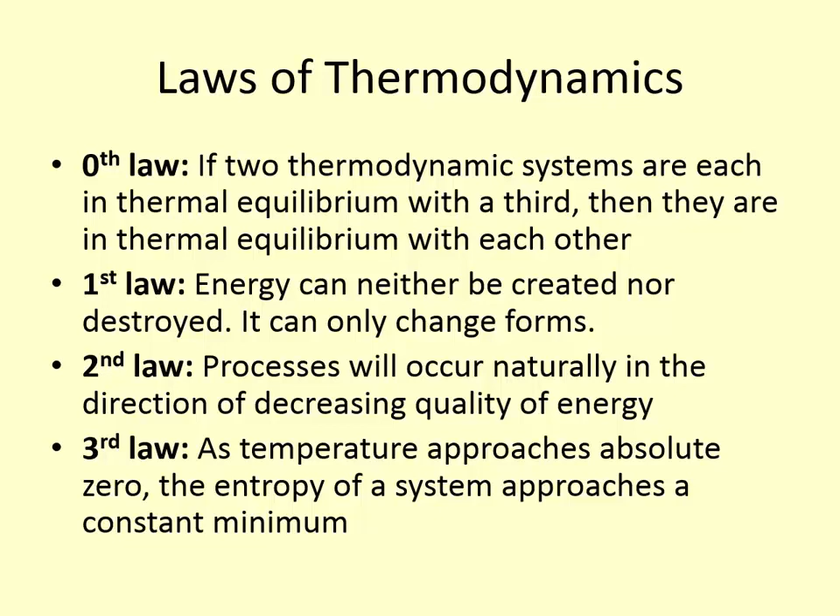So if it's an unsteady flow system, it means it's not at steady state, that there can be mass accumulation or energy accumulation or drain within the system. So the energy or the mass is changing over time. Whereas with a steady flow system, mass is not changing, energy level is not changing, but you have different things coming in and out.

Problem solving techniques. This was an important one for you to hopefully learn and follow throughout the semester on homework, on exams, on quizzes. You can use this in other classes. These steps are very helpful if you get stuck. So restating the problem in your own words just helps make sure that you understand the problem and that you know what it's asking. Drawing a picture, a schematic with known property values helps you to really organize this problem, make sure that you, again, understand the problem, what the picture looks like, and then also pull out important key pieces and put the known property values on there.

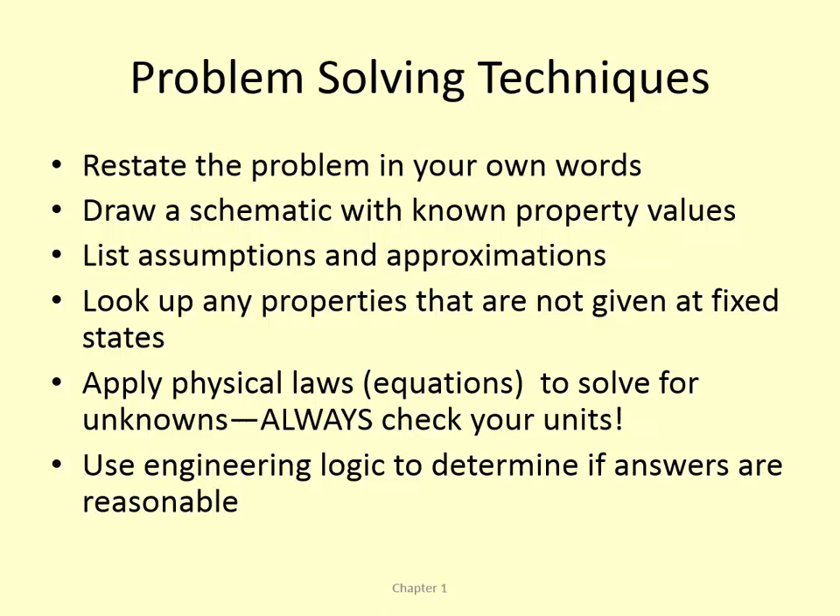And then at the end of the problem, look at it and think, is this answer reasonable? For example, if you come up with a negative pressure, that's probably not a reasonable answer. That's not going to make sense. Or if you're trying to determine cost and it says it's $120,000 per month to operate your air conditioner at home, that's probably not a reasonable answer, right? So you can use that logic to determine that.

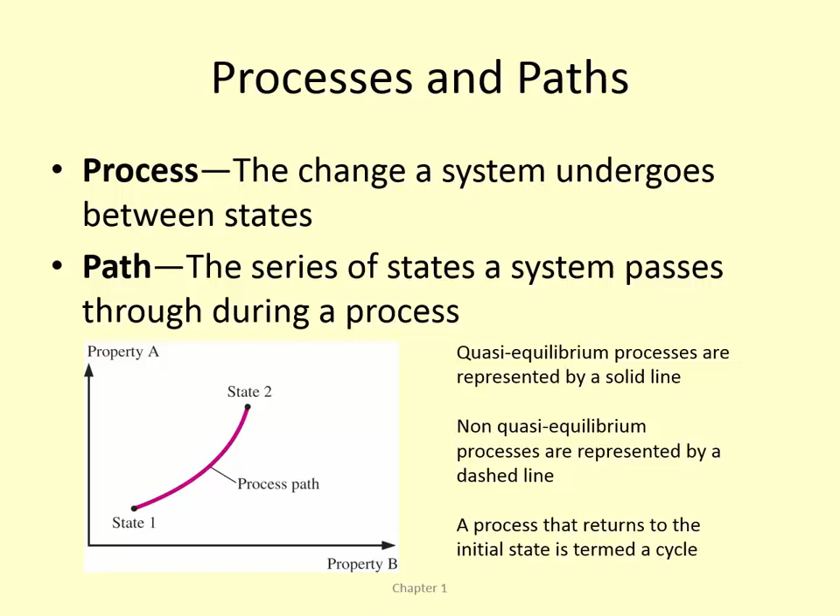Processes are the changes that a system undergoes between states, and the path is the set of states that it follows from one state to another. This process path will be represented by a solid line if it's quasi-equilibrium, meaning we know fairly certain that it's passing through all those states as we go along that process. And then a dashed line if it's a non-quasi-equilibrium process, meaning maybe it's not ultimately clear that it's following that path, but that's what we believe it's following. And if it returns back to its initial state, it's deemed a cycle. So this should all be just review.

Closed systems are ones where mass cannot cross the boundary of the system. However, the boundary may move, so volume can change or not. Energy can cross the boundaries - we can have work inputs, we can have heat inputs, but we don't have any mass flow across the boundary. So that's the main distinction between open and closed. It's closed to mass, not necessarily to energy.

And we've seen a lot of examples of closed systems where it's a piston cylinder device and the boundary moves, which in many cases we have to remember to add in that work term as we undergo the process, or undergo the analysis of the process.

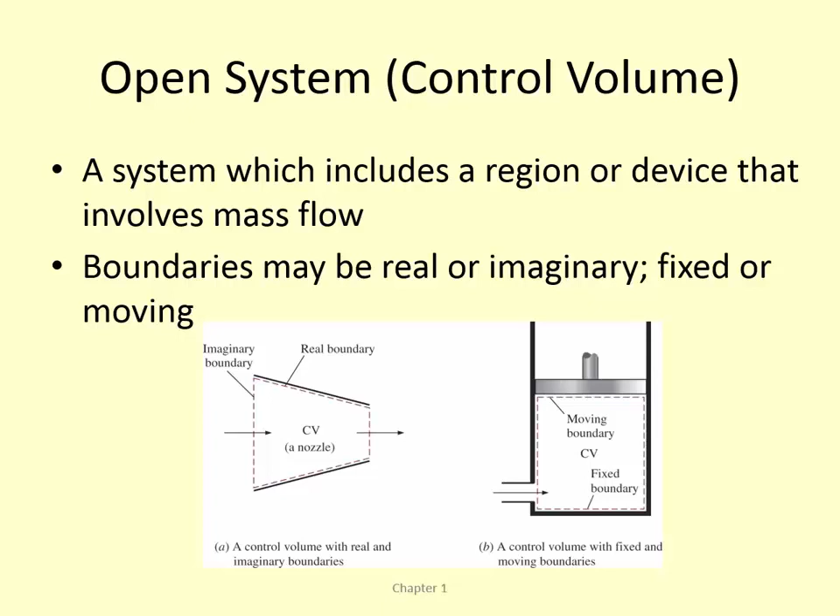Open system is also called a control volume, and it's a system which includes mass flow. So there may be openings where mass is flowing in, mass is flowing out. There may be just an inlet, there may be just an outlet. An open system is any of those cases, but we can make the distinction in subcategories of open systems that are steady flow and unsteady flow. And again, we can have real boundaries or imaginary boundaries. So the opening of a nozzle would be an imaginary boundary - there's not actually a physical structure there, but it's what we're calling our boundary. And then the boundaries can be fixed or they can be moving, like in a piston cylinder device with some sort of a valve where things can enter and exit.

We talked about properties a lot during this class, and hopefully you understand the difference between intensive and extensive properties. Extensive properties are those that depend on the mass or the extent of the system. So mass and volume are certainly extensive properties, because if you were to draw an imaginary line dividing your system in half, intensive properties wouldn't change at all - they're independent of the mass, whereas extensive properties would be divided in half. So mass and volume depend upon where you place your boundary, whereas temperature, pressure, and density or specific volume do not. And we can take an extensive property like volume and turn it into an intensive property by dividing through by the mass. Anytime we divide something through by mass, we turn it from an uppercase letter to a lowercase letter - that's the nomenclature we use in this class.

And the state postulate is that the state of a simple compressible system can be fixed by two independent intensive properties. So when we talked previously about fixing the state, it's so important that we use independent properties, and they have to be intensive properties.

Temperature and pressure are independent in the compressed liquid region and the superheated region, but if we're operating under the dome, they're not independent. During a phase change process, temperature and pressure are very much dependent on one another, so they can't be used to fix the state under the dome. We need an additional property to fix the state, and we can use that to determine how far along that line we are. We might know we're under the dome and that temperature and pressure are specific values, but to find where we are along that line, we need one additional property.

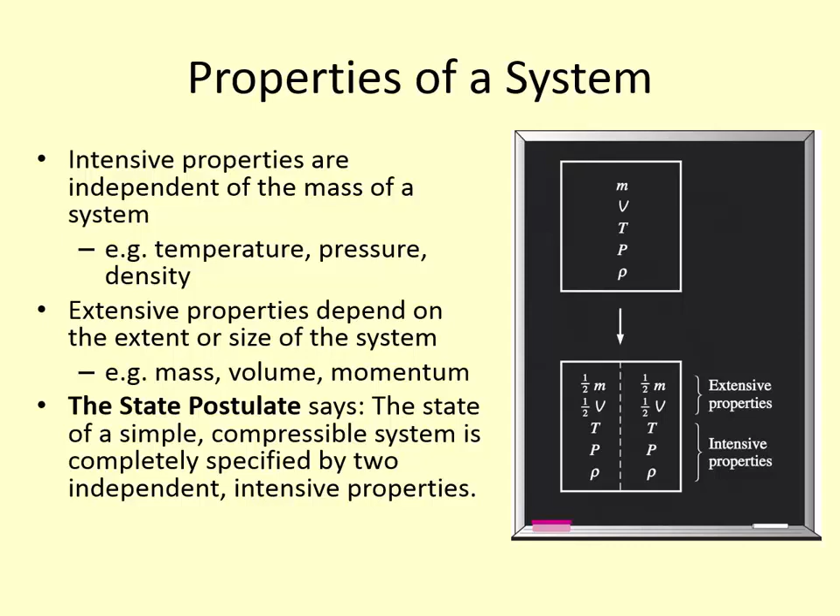The temperature scales we've used in this class are primarily Celsius and Kelvin, but also Fahrenheit and Rankine. You need to know how to convert between those temperature scales. If you're given information in a problem that's in Fahrenheit, you don't need to convert to Celsius and then to Kelvin—you can just convert directly to Rankine if needed. Be aware of how to do those conversions and do them correctly. Last exam, or maybe the one before, there were some issues with that, so be careful.

Also note that the change in temperature in the Kelvin system is the same as the change in temperature in Celsius. So if you're calculating a delta T, you don't need to do any conversion to change it to delta T in Kelvin versus Celsius. They're the same because the slope of the line is exactly the same for those two—there's just an offset. The same applies for the Fahrenheit and Rankine scales.

We talked about pressure and calculating pressure. The absolute pressure is the actual pressure at any given point. Gauge pressure is the difference between your actual pressure and atmospheric pressure. For example, when you're pumping up a tire and you measure the tire pressure, you're measuring the difference between atmospheric pressure and the pressure inside your tire—that's what a tire gauge measures. Vacuum pressure is the same thing, but if you're below atmospheric pressure, we call it vacuum pressure and state it as a positive value rather than a negative gauge pressure. So they're the same thing—absolute pressure is just the actual pressure.

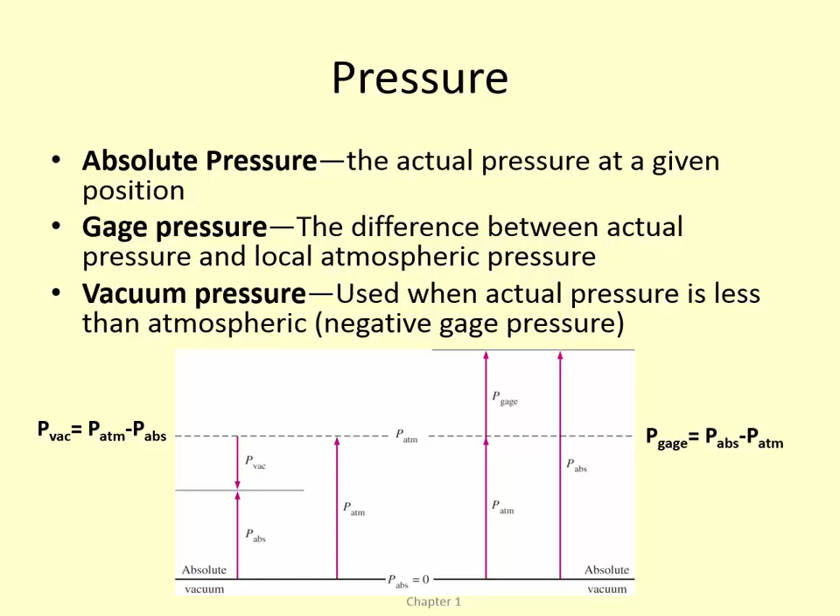Atmospheric pressure in this room is probably pretty similar to the atmospheric pressure outside, so it's also considered the absolute pressure since there's no difference between this and atmospheric. However, if we start pumping lots of air into this room, we may have a slightly higher pressure in here than outside, or vice versa because of a storm rolling in. Understanding the difference between those, and also knowing how to calculate pressure with depth—it increases linearly with depth, and that relationship is linear with density and height. We can add density times gravity times height to the atmospheric pressure to determine pressure at any depth. If there are multiple fluid layers, we can add them in series, knowing the individual density and depth of each fluid.

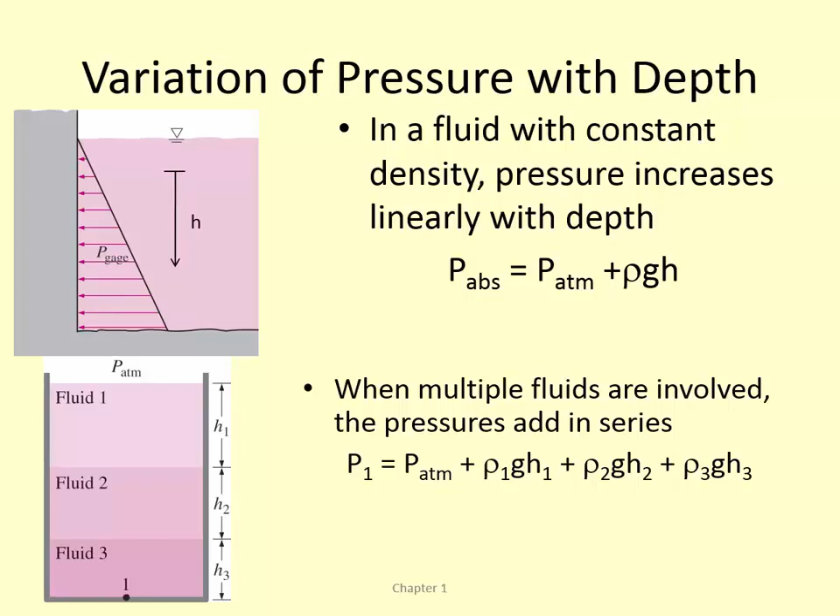Heat and work are both energy transfer mechanisms, measured in kilojoules if we're working in the SI system, and in the English system it would be like BTUs.

We recognize heat and work in the process. There's no such thing as a system having a certain amount of heat or work associated with it—we only see the effects as a system undergoes a change or process. They're recognized at the boundary of the system, and as such we can define our boundaries to either include work interactions or not. It's very important to remember this as you define your system and draw your boundary—you can purposely place boundaries such that you would or wouldn't need to know work interactions.

An example of that is a heat exchanger in steady flow engineering devices—we can use the boundary of the heat exchanger as the boundary of our system, and by doing that we don't have any heat interactions; we just have an inlet and outlet with mass flow. However, if we wanted to know what heat interactions were going on inside the heat exchanger, we would use each individual fluid as its own system, and then take into account the heat crossing the boundaries there. So anything happening within the boundaries of the system isn't necessarily accounted for in our calculations. If we're just trying to find mass flow rates, we can look at it without needing to know the heat transfer inside.

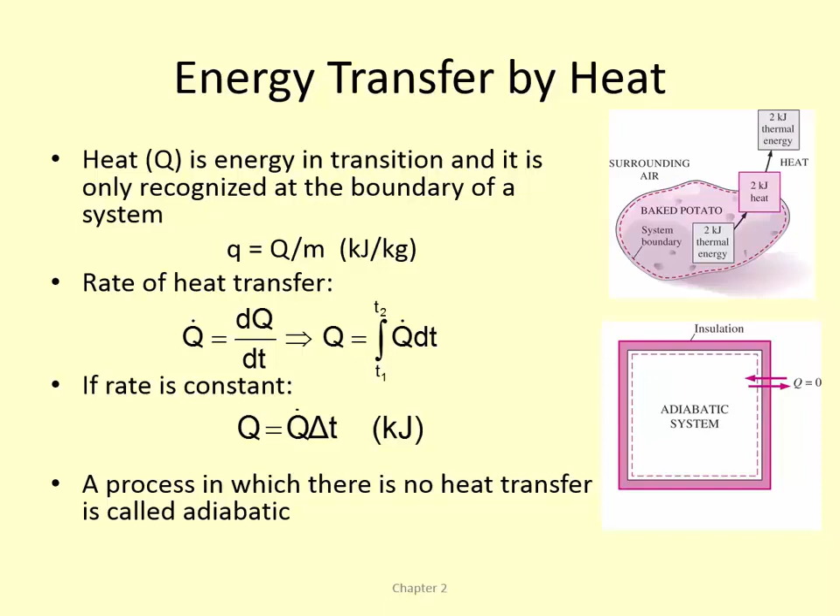A process in which there's no heat transfer is called adiabatic. It's important to distinguish between adiabatic and isothermal, because students might think that if a system is adiabatic, it's also isothermal, which is not necessarily the case, and many times isn't. Those two are not synonymous — temperature can still change due to mass flow or work interaction, so it's not a given that it's isothermal just because there's no heat transfer.

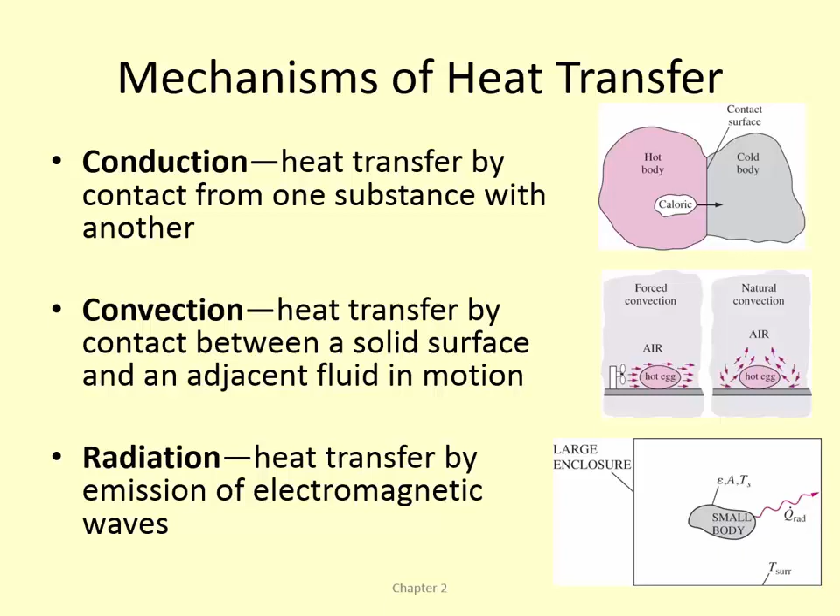We can transfer heat via conduction, which is actual physical contact from one surface to another; convection, which is heat transfer between a solid surface and an adjacent fluid; and radiation, which is transmission by electromagnetic waves. We don't really get into these three topics in this class — that's a topic for heat transfer itself, a whole semester on its own.

We can transfer energy by work, and in order for something to be considered work, either there's a force acting on a boundary or the boundary is moving. Those two mechanisms are what we consider to be work. Everything else is heat transfer.

Work is recognized at the boundary of the system. So if there are things going on inside the system that our boundary doesn't include, or they're not crossing the boundary at all, we don't have to worry about those work interactions.

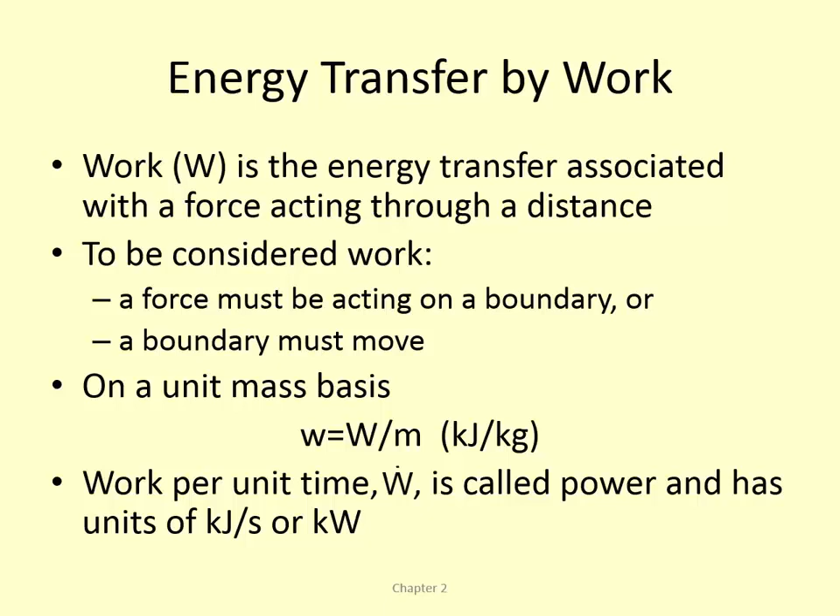There are many types of work — we've used electrical work in this class, and I think we did a problem with shaft work and spring work. There's also work required to change the potential energy of something, recognized as we go through an elevation change or distance, and work required to accelerate a body, which is the same as kinetic energy. We view those also as work terms, because either something is moving or a boundary is moving, so they qualify under work.

We can also transfer energy by mass flow. In an open system, when mass flow crosses the boundaries, we have energy associated not only with bringing mass into the system, since this mass has some energy associated with it, but also some work involved in pushing other pieces of fluid out of the way so that this mass can come into the system. We take into account both of those things in the flow work and the internal energy change.

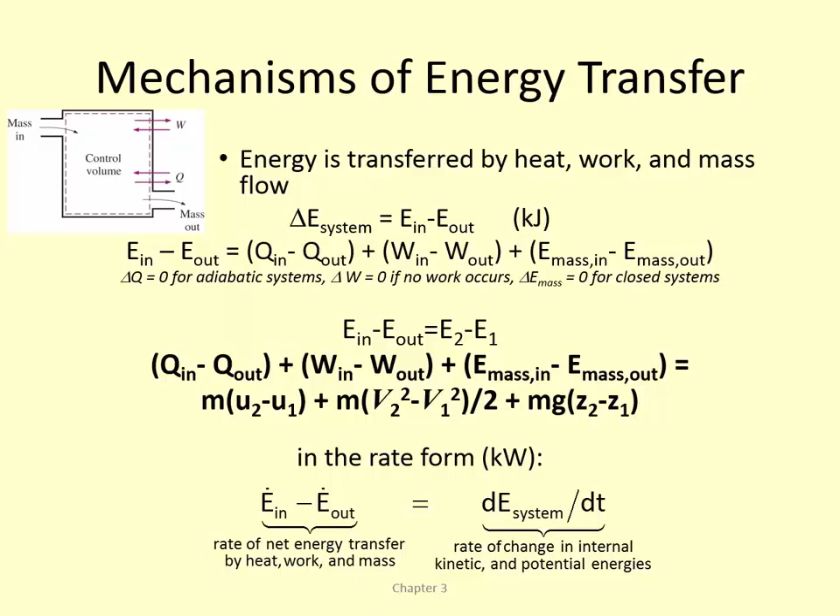We've talked a lot about efficiency in this class, looking at it in many different ways. The first way is determining something that indicates the performance of our system: we have some desired outcome or output, and we're required to put something in for that to happen. If we think of efficiency as desired output over required input, it's easy to apply it in many different situations without necessarily having to memorize the equations.

So whether we're looking at steady flow devices, turbines versus compressors, or something that's work consuming versus work producing, we can figure out the performance for a heat pump or a heat engine without necessarily memorizing all the terms involved. We just need to remember: what am I putting into the system that's required, and what am I trying to get out?

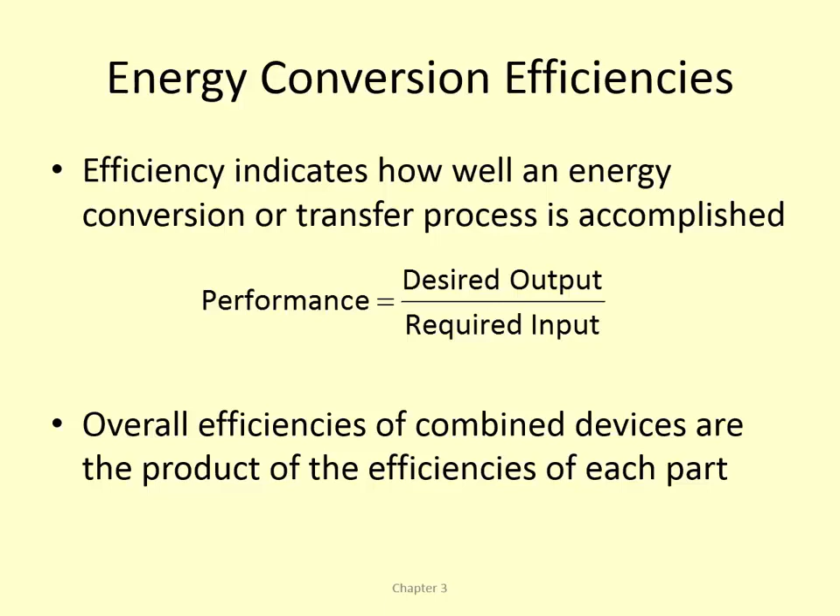And then if we calculate efficiencies of each individual piece, we can multiply those efficiencies together to find combined efficiencies.

Pure substances are ones that have fixed chemical composition throughout. We looked at pure substances as our working fluids in many of our open systems, and also in our closed systems. We make that assumption just so we can easily analyze property values, that even though air is composed of many different things, like water vapor, nitrogen, and lots of different things, we can simplify it and just look it up as air, which has a table in the ideal gas tables, and water has a table in the ideal gas table. We don't need to necessarily know all the different components of how hydrogen and oxygen change with temperature. We just look at it itself.

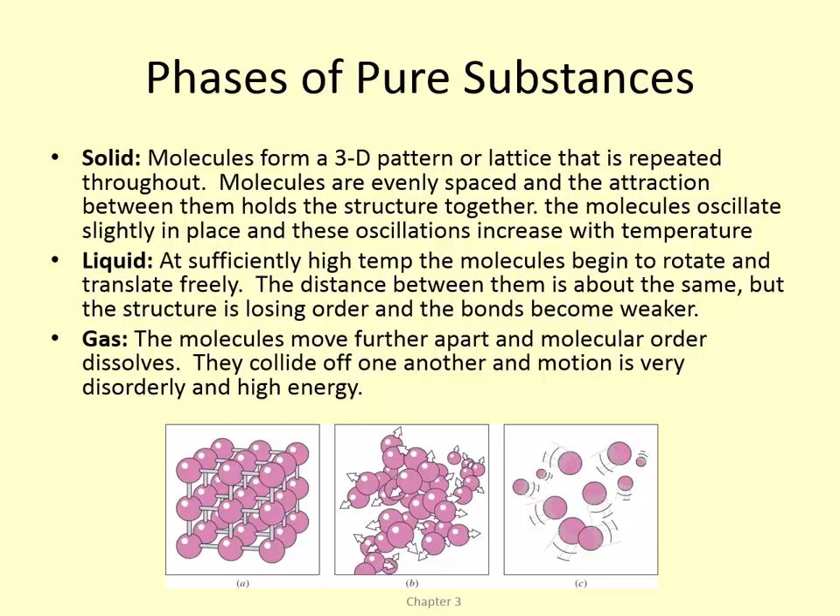We've looked at phases, so we have solid, liquid, gas. I think you understand that fairly well. The main important point is that solid is a lower energy state, but it's also a lower entropy state. It's more stable, more readily defined, whereas as we increase the motion of the molecules by adding heat, we have higher energy, but we also have higher entropy. So those are the two ends of the spectrum.

TV diagrams - we talk a lot about the dome in this class, so understanding what that means physically. We have a compressed liquid region to the left of the dome and a superheated region to the right of the dome, and everything under the dome is considered a saturated liquid vapor mixture.

It's important to know how to calculate quality, to be able to identify what state you're in. So as you go to property tables and look up pressure and temperature, are you able to identify whether you're superheated or whether it's a saturated liquid vapor mixture? And if it is a saturated liquid vapor mixture, do you know how to find the quality? That's really important.

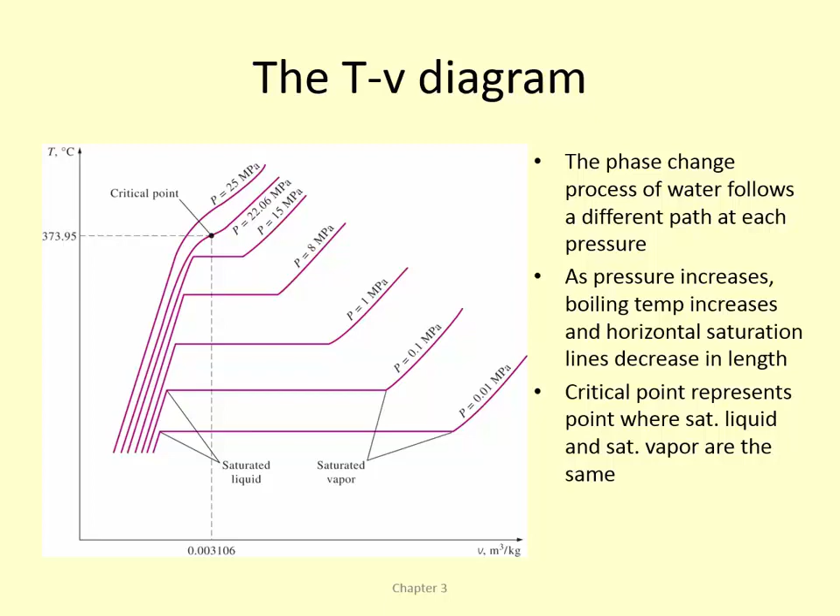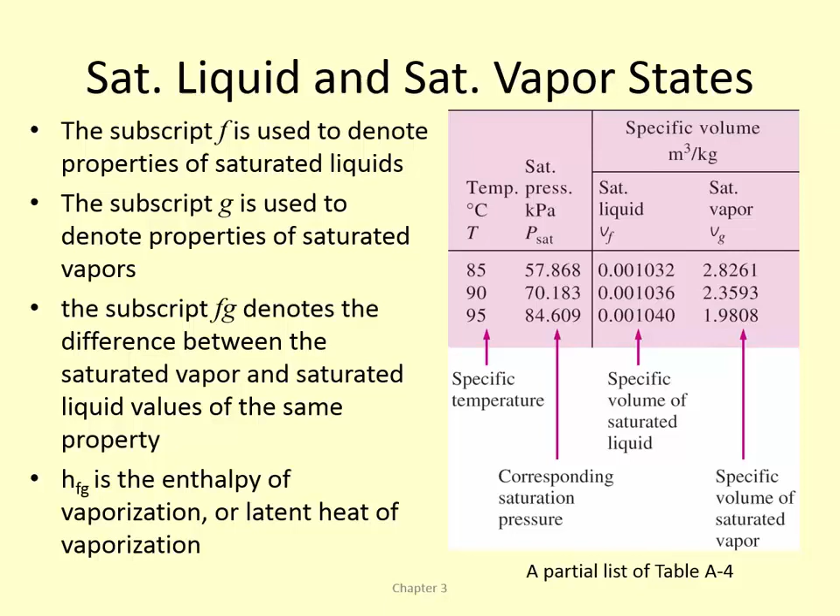Hopefully this is all review and it's super easy for you. But using the tables, we have properties with the sub F subscript meaning liquid properties, and the sub G meaning vapor properties, and then we can calculate the difference between those two, and we call it VFG, which is VG minus VF, or HFG, which is HG minus HF.

But calculating quality is, I think, maybe the Achilles heel for some students in this class - it's the mass of the vapor divided by the total mass of the mixture. So you're trying to figure out how far along that line you are. If it's a line of constant pressure or constant temperature proceeding horizontally through the dome, you want to know exactly where on that line you are, because pressure and temperature don't do it - they just tell you you're somewhere on that line.

So if you know either the fraction of mass that's in a vapor or liquid state, or if you know another property value, then you can use that information to calculate the quality. And using the quality, you can calculate all of the other property values to tell you where you are in that fixed state.

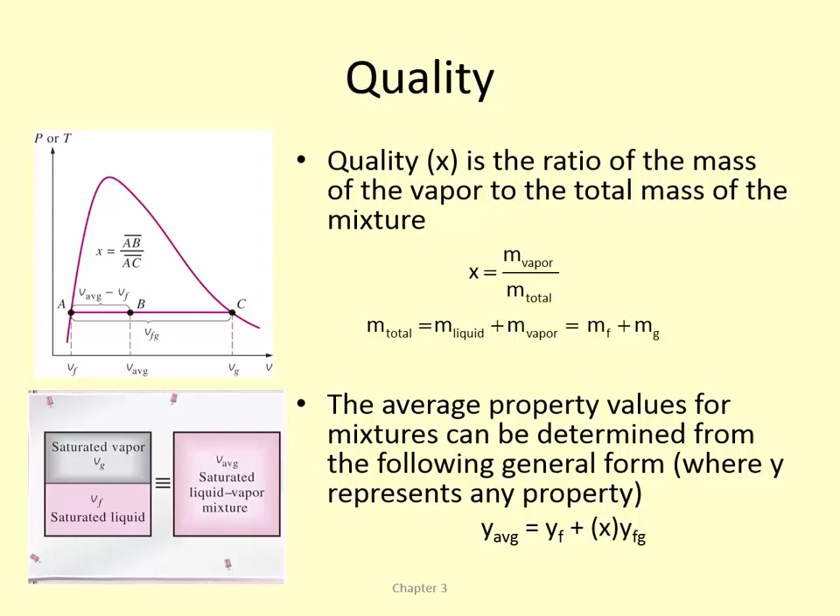We use the ideal gas equation of state in a couple of different forms, and it shows up later as we perform analysis on steady flow devices and as we look at the isentropic assumption and things like that. Again, you can only use the ideal gas equation as it's applied to ideal gases, right? It doesn't work for water, it doesn't work for refrigerant. You'll get answers that are very, very wrong from where they should be.

And if your mass is fixed, so in a closed system dealing with an ideal gas, you can set M1 equal to M2, which means that P1V1 over T1 is equal to P2V2 over T2. This only works if your mass is fixed and they're equivalent quantities at each state.

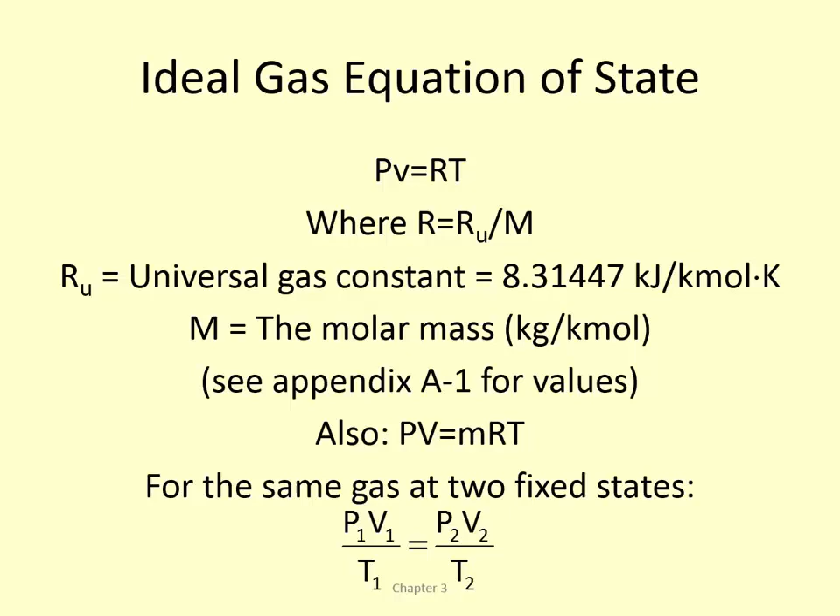The reason we can't use the ideal gas equation for non-ideal gases is because their behavior is distinctly different. The ideal gas equation prescribes a certain set of parameters that help identify how a gas will react under certain pressure conditions. So if you increase the pressure, what happens? If you decrease the temperature, what happens? It's related to the gas constant of the system, linearly changing with it. Some gases behave like ideal gases at very low pressures or very high temperatures, but anytime we're operating close to the dome, or in particular at or near the critical point, our ideal gas behavior sort of goes out the window.

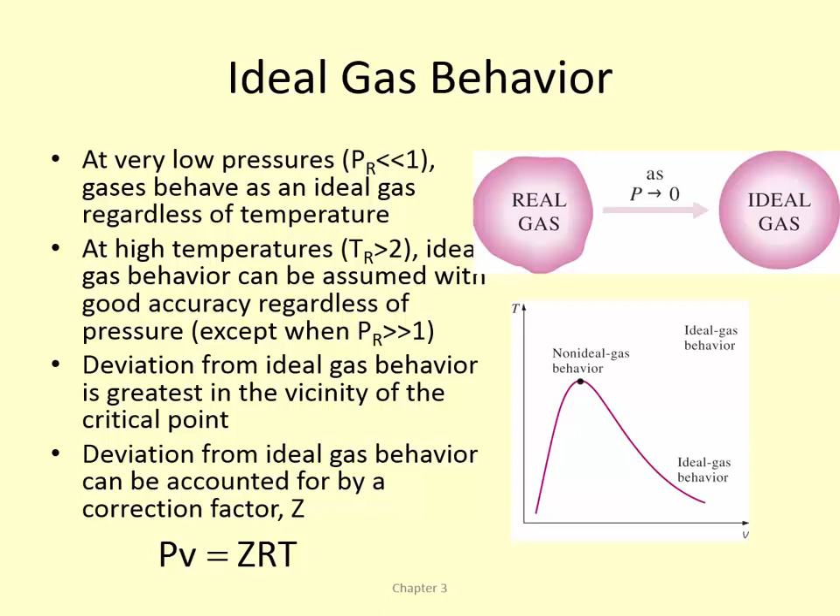We did learn how to calculate and use a correction factor Z that allows us to account for non-ideal gas behavior, and just using these same equations with this correction factor gives us a pretty good approximation for non-ideal gas behavior.

This is derived using the principle of corresponding states. There's this idea that if we divide the actual pressure of our non-ideal gas by the critical point pressure, and do the same thing with temperature, dividing by the critical point temperature, we get a reduced pressure, reduced temperature, and also a reduced specific volume if we want to calculate it that way. When we do that, we normalize our working fluid by its own critical point, and we find that they follow a very similar trend.

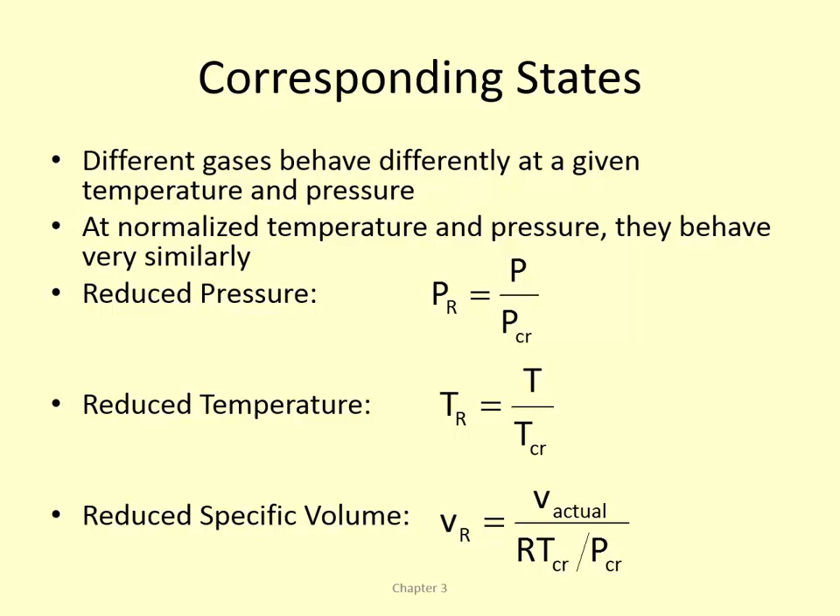These trends have been plotted on a compressibility chart. So if we calculate a reduced pressure and a reduced temperature, we can look up a compressibility factor that allows us to make a pretty good correction to our ideal gas equation, getting us closer to the correct values we'd find if we looked it up in a table. We did a little bit of that this semester. It's a good concept to remember.

We also talked about polytropic expansion or compression, where in some cases this behavior can be modeled quite readily by the relationship PV to the N equals some constant. For an ideal gas, the constant is the gas constant, so PV equals RT, N equals 1, and C equals RT.

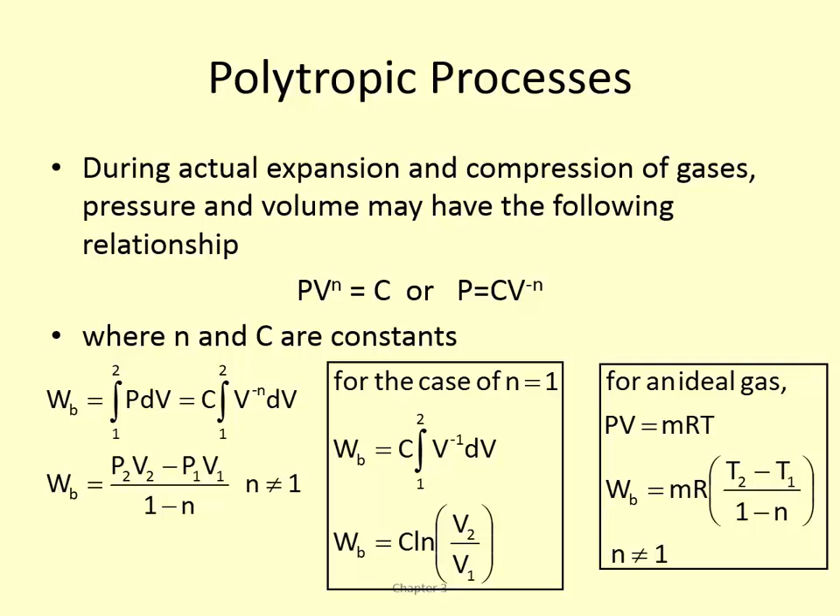We've talked about boundary work. Boundary work is just the integral of P dV, and if it's a constant pressure process, the P comes outside the integral, and we just integrate dV, which gives us V2 minus V1. So we simply need to know the distance the cylinder moves, or the change in volume, to calculate how much boundary work is being done.

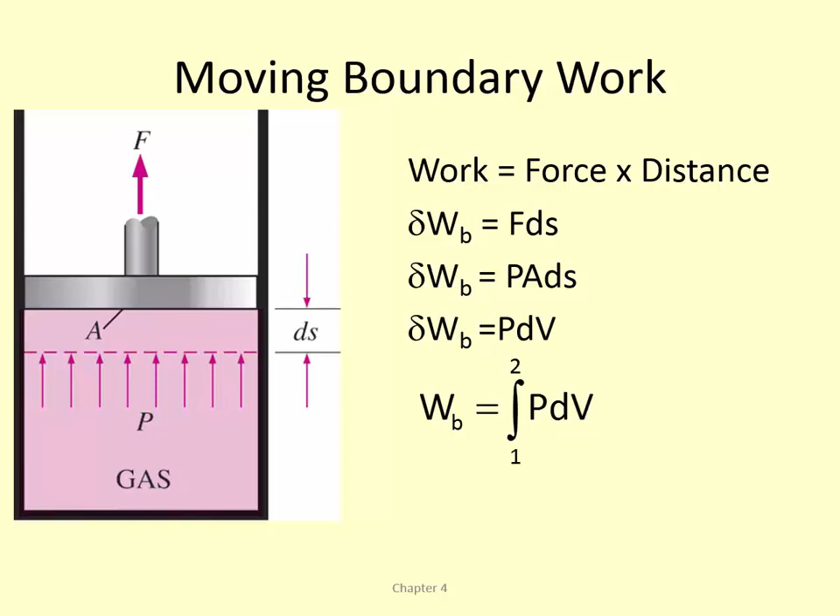We can also figure out how much boundary work is being done by numerically or graphically calculating the area under the process path. In the case of a linear path, we did many examples where we simply plot it graphically and use geometry to figure out the area under the curve. Otherwise, we need to know the relationship between pressure and volume and then calculate the integral. Sometimes that relationship is fairly easy to integrate, sometimes it's a beast to integrate, and other times we just have data points and have to graphically figure out the area under the curve.

For a closed system, our energy equation is equal to the change in internal energy. But we found in many cases that if it's a closed system with boundary work, we can take that boundary work term and move it to the other side of the equation, and we come up with this term that's delta U plus P delta V, the boundary work. This has been lumped together into a term called enthalpy. So enthalpy accounts for the internal energy plus the boundary work in a closed system.

And in an open system, it accounts for internal energy plus the flow work.

Some examples of that would be phase change along a saturation line, which is a constant pressure process. Also a frictionless piston cylinder device is a constant pressure process. Part of your system analysis is identifying any property values that might be constant and pulling that out right away, writing that down, isobaric, isothermal, whatever it might be. If it's a constant pressure process, it makes the boundary work very easy to calculate. However, you can't do this if it's not constant pressure, because P is changing.

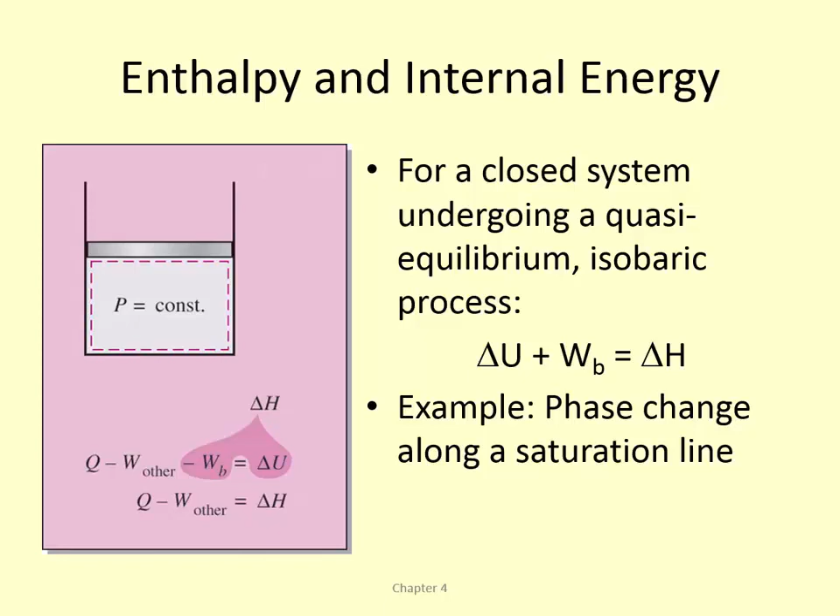The specific heat is the amount of energy required to raise a unit mass by 1 degree, and we can do that at either constant volume or constant pressure. So we have two different specific heats defined in two separate ways. C sub V is related to the change in internal energy. If the volume is maintained constant, then we don't have boundary work going on either, so we have C V dT is equal to dU.

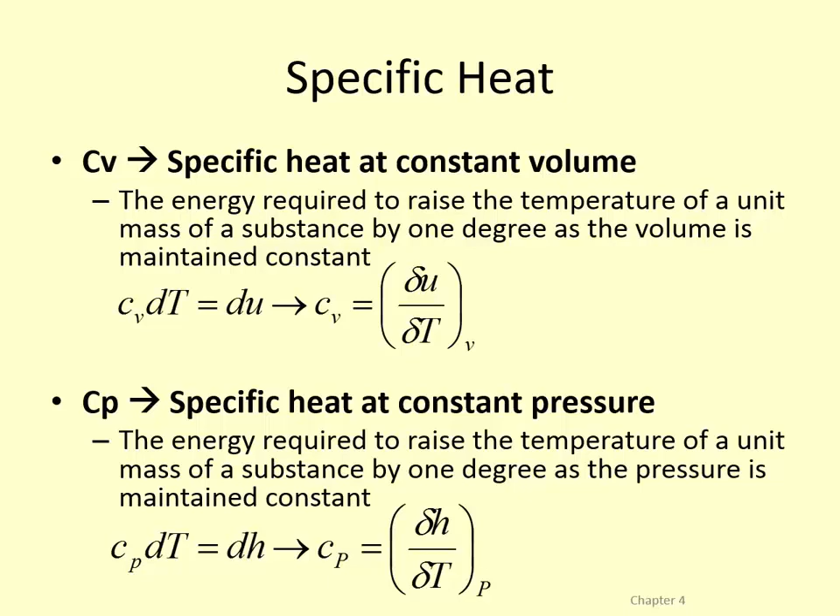For specific heat at constant pressure, maybe we do have flow work or boundary work, but it's a constant pressure process, so we have C sub P dT is equal to dH. We use C sub P quite often if we can assume it's not changing significantly, or it's a small change.

So we can determine delta U and delta H three different ways. One, we can use tabulated data for both, which is pretty easy, assuming we have tables that are accurate and up to date. We can use the functional relationship between specific heat and temperature and integrate, which is kind of cumbersome and not really fun to do by hand. Or we can say, I know C sub P and C sub V may be changing, but I'm going to assume it's just some average value. That's pretty accurate if it's a small temperature change or interval.

And you can calculate C sub P average two ways: you can either find it at the average temperature, if you know your initial and final temperature, or you can look at the beginning and the end and average those two values.

We did some examples toward the end of the semester where we didn't know a final temperature, but we needed to use C sub P or C sub V. So we guessed a final temperature and calculated using that. Then we came back and calculated our actual final temperature and saw how close it was. If it's really far off, we redo the calculation with a new estimate using a new C sub P, and iterate until we find a value that's close.

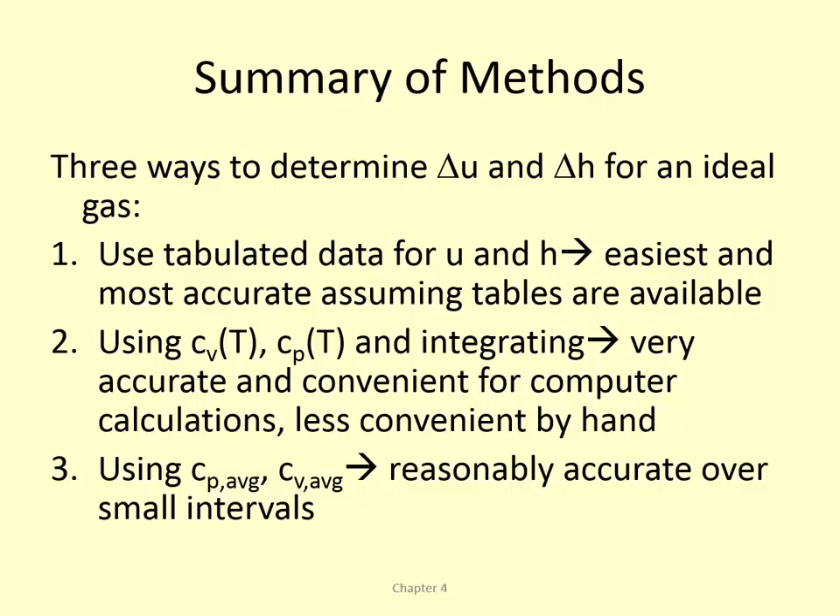I've already said I'm not going to give you a problem like that on the final where you have to iterate. But it's important to know how that process works, because many times in design you don't know the final outcome until you build something. You have to guess, based on knowledge of previous systems, about how hot it gets, so you guess a final temperature, calculate what it should actually be, and redo your calculations that way. A lot of engineering starts with an educated guess, and this is no different.

Steady state devices: chapter 5 is full of steady state devices, and it's probably one of the more difficult chapters to get through and understand. But once you do, you can apply these principles across the board to any steady state device, any kind of problem it might throw at you.

So some consequences of steady state: usually the volume isn't changing, so we don't have any boundary work. Usually the mass is constant. Well, always the mass is constant for steady state.

So dm/dt is 0, and the energy state isn't changing either, so dE/dt is 0. So our mass flow in equals mass flow out, and energy in equals energy out. Looking at those forms of the energy equation for steady state devices, with in on one side and out on the other, we can switch terms back and forth, making sure we flip the signs as we do. But these are the basic equations we use.

So we need to look at each of the individual terms for these steady state devices. That Q dot, or Q, is the heat transfer between the control volume and the surroundings. It will be a negative value, or an out value, if the control volume is losing heat. If it's adiabatic, there's no heat gained or lost.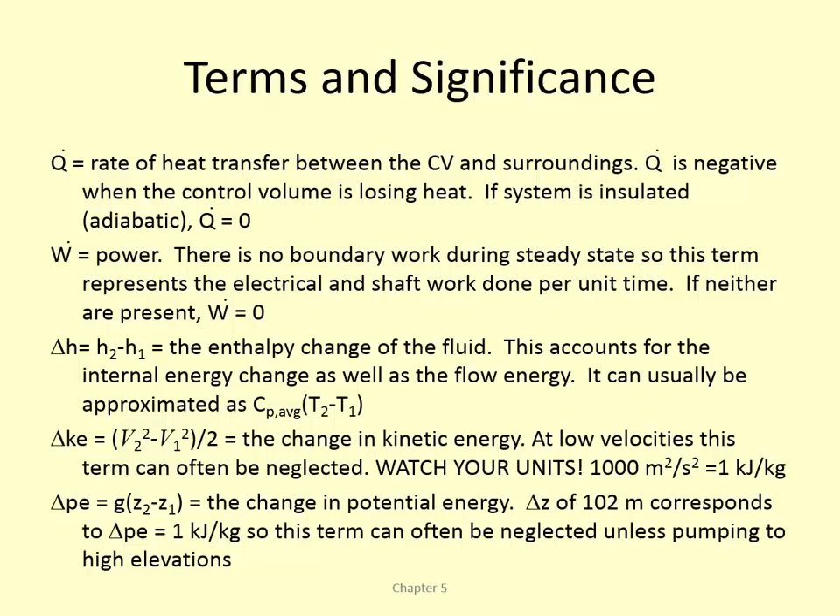So if you don't make that conversion, your calculations will be way off. The same thing goes for the change in potential energy - be very careful about your units on that. In many cases, that one is neglected because it's pretty insignificant, but it may still show up.

In general terms, when we perform the mass balance, it's mass in minus mass out equals the change in the mass of the control volume. If it's a steady flow system, then the control volume mass is not changing, so it's just the sum of the mass flow in equals the sum of the mass flow out.

And if it's single stream, we just have an m dot in and an m dot out. If it's a steady flow incompressible stream, our volume flow rates are equivalent. And if it's steady flow incompressible single stream, then velocity times cross-sectional area is equal on the inlet and outlet. Knowing which assumptions you can or cannot make and how it simplifies your equations is pretty important.

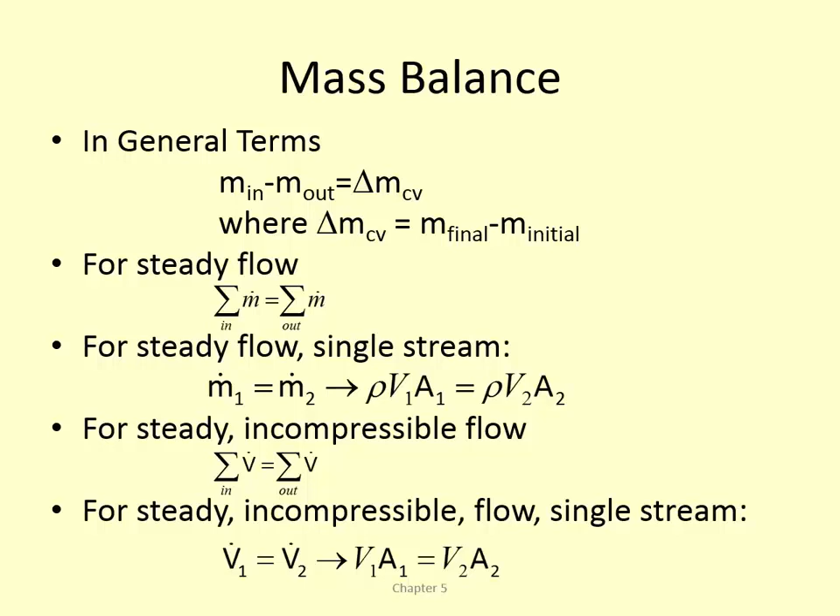Because on the final you'll have just this equation sheet - it's actually 2 pages now - with tons of equations. It's up to you to know how to apply and use them, because it's very easy to use the wrong equation just because you see, oh, there's temperature, there's pressure, that's what I need, right? You need to know what assumptions can be made.

Okay, so nozzles increase the velocity of a fluid, diffusers decrease the velocity of a fluid. There's no work interactions unless, maybe sometimes there's a heater inside the nozzle, like a little electric circuit or something. Usually it happens so rapidly there's no heat transfer, and you don't have to worry about potential energy. However, a change in kinetic energy is pretty important because that fluid velocity can change fairly significantly - in some cases, coming into the nozzle it's almost 0, and then coming out of the nozzle it's pretty high.

With a turbine or a compressor, we have mass flow in and out, and then if it's a turbine, there's a work output, and if it's a compressor, there's a work input. Kinetic energy is usually 0, but sometimes we need to know it.

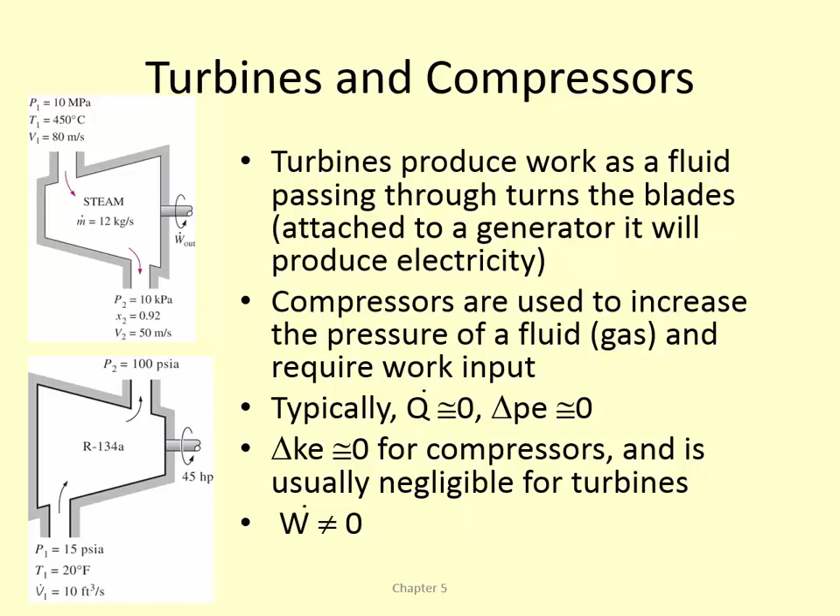If there's velocities given and you're asked to calculate it, I would calculate it, being careful about units. Our work interactions are never 0. You don't know necessarily about the heat transfer unless it's given in the problem. Usually there's not significant heat transfer because they're well insulated, but that's not always the case. As we saw with compressors, there is an advantage to actually removing heat as we compress these fluids. So later in the semester when we look at isentropic compressors, and even doing better by trying to operate an isothermal compressor, there is significant heat transfer involved there.

Throttling valves are a constant enthalpy process, and it's any kind of flow restricting device. It could be a valve, a plug, or just a very narrow tube that doesn't allow flow to pass through readily, causing significant pressure drops without needing to perform any work, which is kind of nice. For an ideal gas, enthalpy is a function of temperature only, so for a throttling valve using an ideal gas, the enthalpy will be constant and the temperature will also be constant, so they're also isothermal.

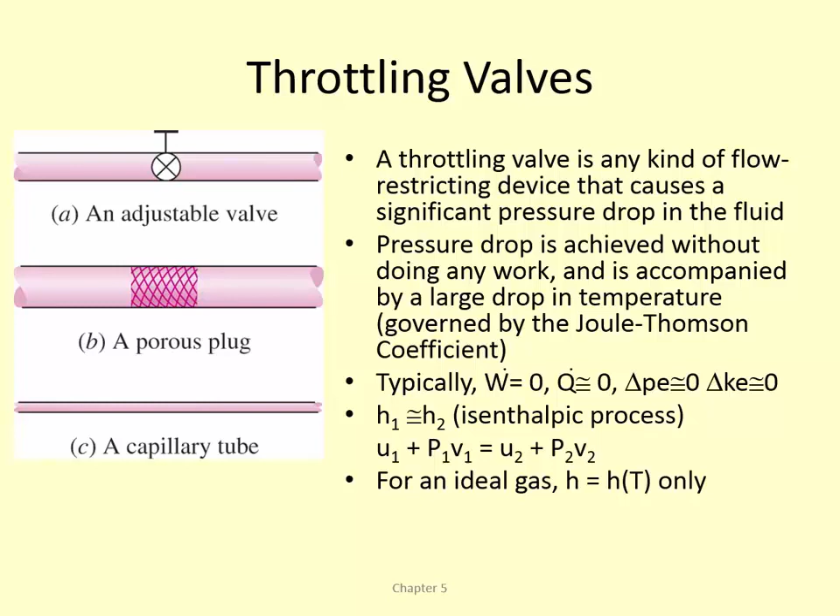Mixing chambers are any devices where two or more fluid streams come together, so they can mix and then go out one way. A lot of times it's just an elbow with cold water coming in, hot water coming in, and warm water coming out. There's usually not any work interactions unless there's some sort of stirring device. Heat transfer to the surroundings is usually zero, and kinetic and potential energies are usually zero. So you're just interested in the relative mass flow rates of each stream and their enthalpy values. You're changing the energy of the system just by mixing fluid streams of different temperatures, different energy states, and in some cases different flow rates.

Heat exchangers exchange heat between fluids without them actually physically coming in contact. Usually there's no work interactions, and the kinetic and potential energies are negligible. If we define our system as the boundaries of the heat exchanger itself, then we won't have any heat interactions with the outside. However, if we look at the individual fluids themselves, then there most certainly is heat transfer associated with that heat exchanger. That's the purpose of it, to transfer heat from one fluid to another, and the direction of the heat transfer will always be from the hotter fluid to the colder fluid.

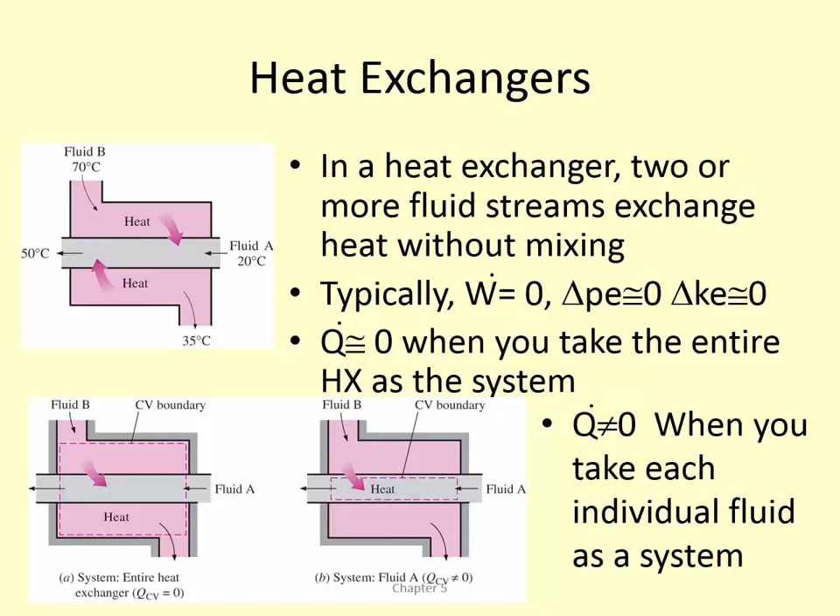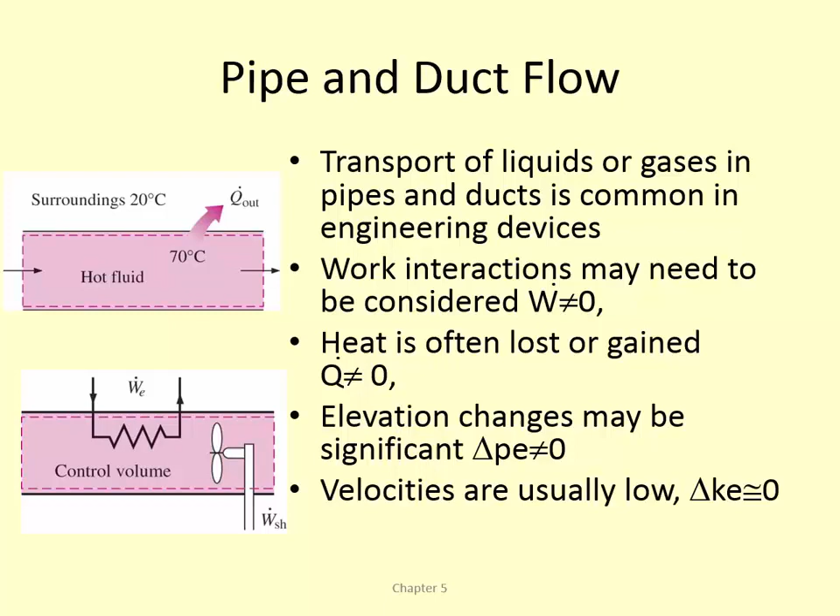In pipes, they're somewhat boring in terms of whether there's work interactions or heat interactions. We just have to look at the pipe individually and see what's going on with it, whether there's velocities that are significant or significant elevation changes. We don't necessarily make any grand assumptions about pipes. It just all depends on the problem when you get to it, and being very careful to look at it and see: is heat being lost? Are there any work interactions? What's going on with this particular pipe before you can say anything about it?

During steady flow processes, the properties of the control volume itself are not changing with time, although there may be different properties at the inlet and the outlet. The control volume itself is steady, the properties are not necessarily uniform across it, but they're steady with time, they're not changing.

During unsteady flow, the properties of the control volume do change with time. So we have to look at it over a finite time period, saying we're analyzing this system from this point to this point, and we want to know what changes have happened, how much mass was accumulated or how much mass left the system. The control volume is not necessarily fixed in size; it could be a piston cylinder device, and we could cause the boundaries to move if needed.

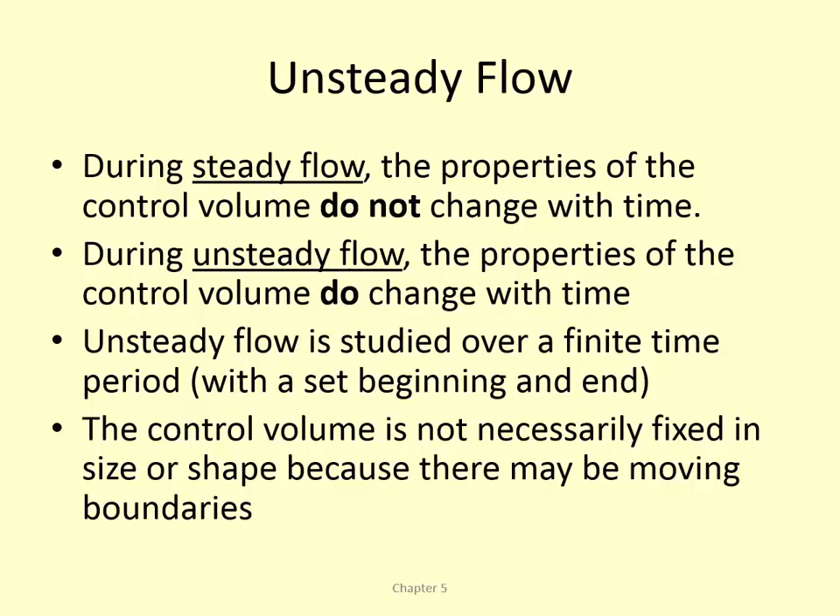So the analysis is slightly different from the steady flow because we have that additional term, or terms, on the right-hand side of the equation. But if we go back to our energy equation, start from the beginning, and are very careful when we cancel out terms, what we have in and out is equal to the change in energy state of the system. That change is equal to the internal energy, kinetic energy, and potential energy of the system as a whole. So if the system itself is moving, changing in elevation, or accelerating, that term on the left-hand side deals with the fluid flow of the streams coming in and out, whether or not they have a kinetic energy associated with them that we need to account for.

So if those terms are negligible, then we simply have Q in minus Q out plus work in minus work out, or we can flip the sign and do it that way, which is equal to the mass flow out minus the mass flow in times the respective enthalpies of those fluid flows, plus M2 U2 minus M1 U1. And that mass flow can be on either side of the equation. Again, we just have to be careful about signs.

Heat engines receive heat from a high temperature source and convert part of that heat to work, and then they have to reject heat to a lower temperature sink. Usually we have a working fluid that is changing phase in the process, going from a liquid to a vapor. We don't often need to know necessarily those energy interactions if we're looking at the large-scale macro version of the heat engine itself.

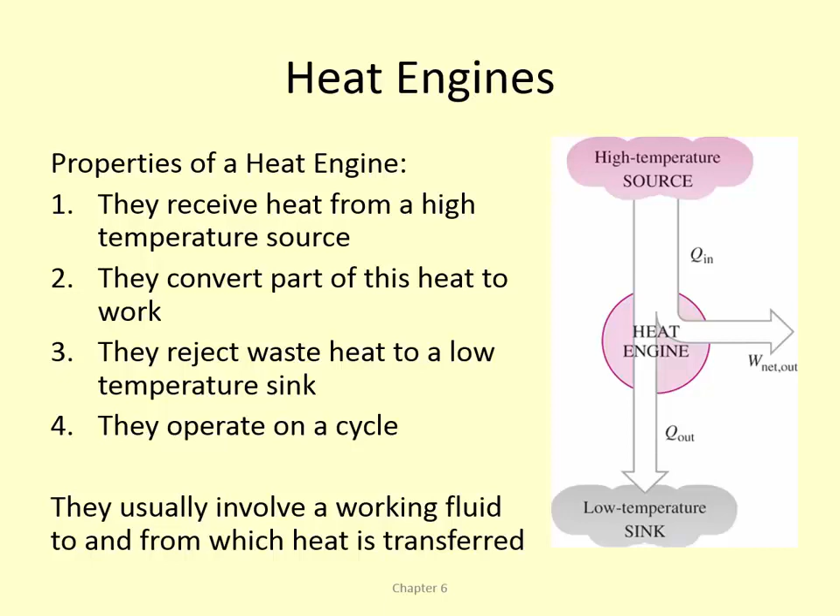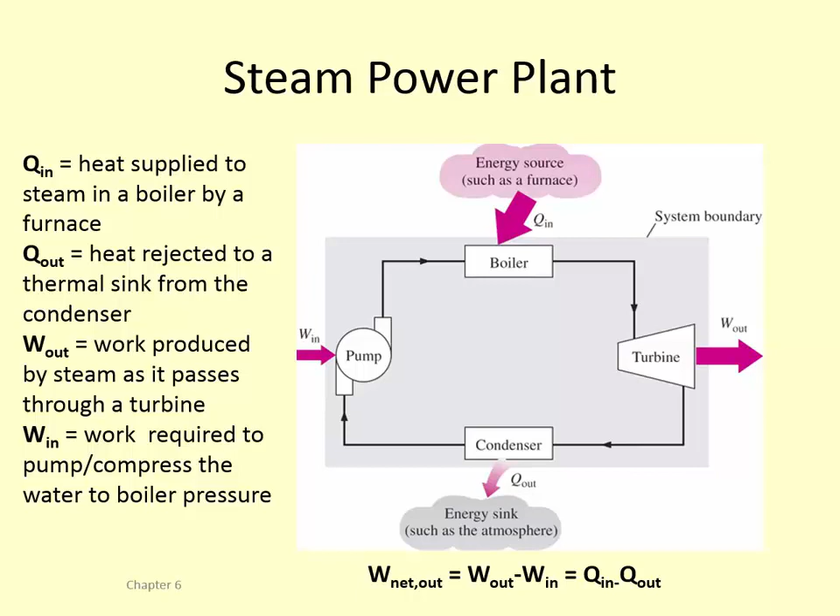However, because we have this knowledge of steady flow engineering devices that we already learned in Chapter 5, we can look at the individual components of a heat engine to determine some of these larger scale property values. It operates on a cycle of steady flow engineering devices such as a boiler, turbine, condenser, and a pump. So we can look at those pieces individually to determine Q in, Q out, work in, or work out. Or maybe we're given those values - we know that it's losing or gaining a certain amount of heat, and that we have some desired work output. So we have to determine how much heat needs to be added to the system. There are a lot of different ways to construct these problems.

We calculated thermal efficiency, again, as a desired output over a required input. For a heat engine, our desired output is the net work out, and the required input is just that Q in, or Q sub H, from the high temperature reservoir.

As we talked about the Carnot law, or Carnot statements, the thermal efficiency of a heat engine can never be 100%. It's usually less than 60%. So that Q that's coming into the system can never be converted to work totally - only a fraction of it is converted to work, and then the rest of it is rejected to a low temperature reservoir.

Kelvin-Planck's statement is that it's impossible for any device that operates on a cycle to receive heat from a single reservoir and produce a net amount of work. Clausius' statement is similar, that it's impossible to construct a device that operates and produces no net effect other than transfer of heat from a low temperature body to a higher temperature body. We talked about how these two statements are manifestations of the second law of thermodynamics. The first one is more about the quality of energy, and the second one is more about the directional properties of energy. Both kind of talk about energy having direction. Those are important to remember and know.

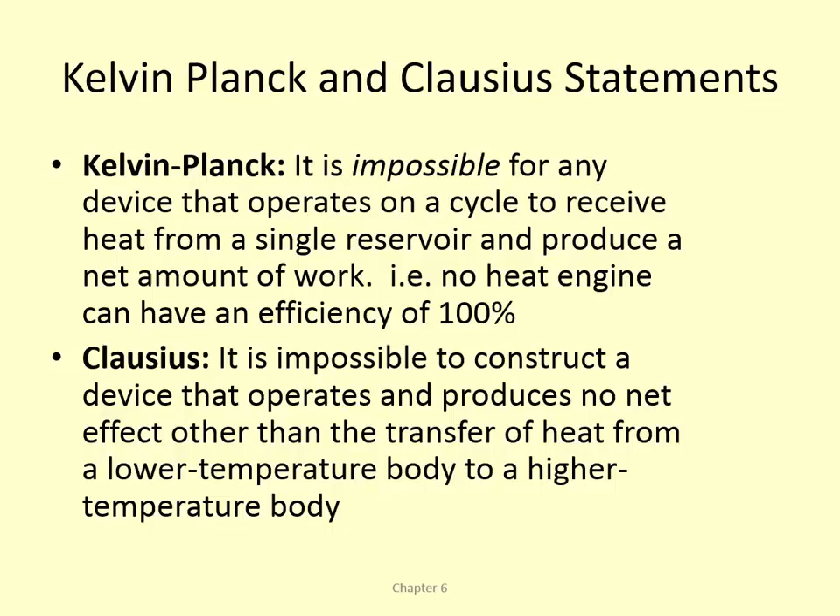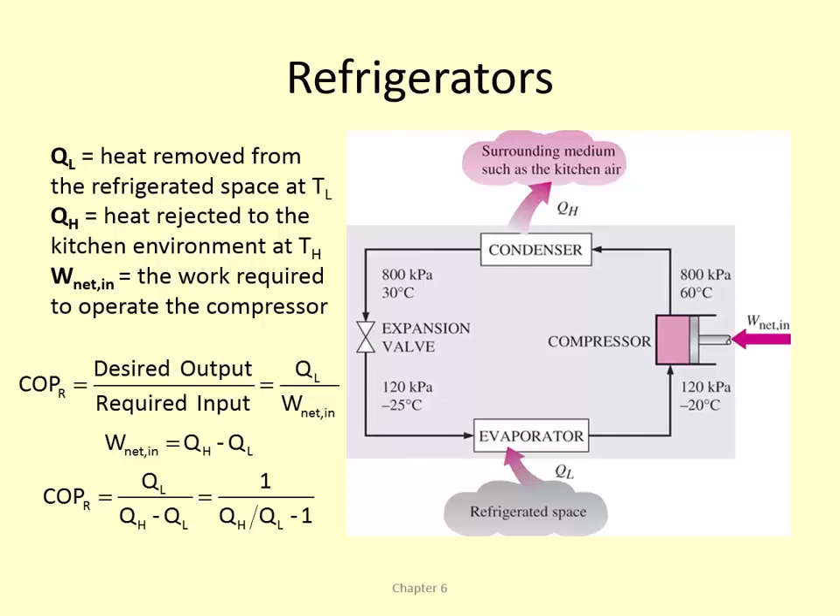With refrigerators, we have heat being removed from a cold space and then deposited to a hotter, warmer space. That's done by virtue of a refrigerant flowing through this thermodynamic cycle consisting of condenser, compressor, evaporator, and an expansion valve. Again, our performance or effectiveness is the desired output over the required input. So in a refrigerator, your desired outcome is making a cold space colder, and in order to do that, you have to put some work into the system. Just remember the goal of the device - what's required? I need to put work into it. That's the best way to remember efficiencies and coefficient of performance - if you keep that in mind, you should be able to figure out what to do.

A heat pump is pretty much the same cycle as a refrigerator, but instead of removing heat from a cold space, that's not your desired output. Your desired output is to add heat to a warmer space. So it's Q sub H over the net work in.

As we analyze these systems, we may be given macro values like work net of this amount and Q sub H of this amount, and asked to calculate the coefficient of performance. That would be a pretty easy problem, right?

Or maybe they'll say you're losing heat from your house at this rate, and the condenser in your heat pump has this inlet value and this outlet value. So you use that information to calculate Q sub L, and then use the other information to calculate Q sub H, and using that, you could calculate the work in and the coefficient of performance.

Being able to apply this energy equation to specific systems or steady flow devices is important. As you read your problem statement, you may have to define your system boundary as one individual device, as the whole thing, or maybe you need to do two separate problems because you have so many unknowns—analyze an individual device and then analyze the whole thing.

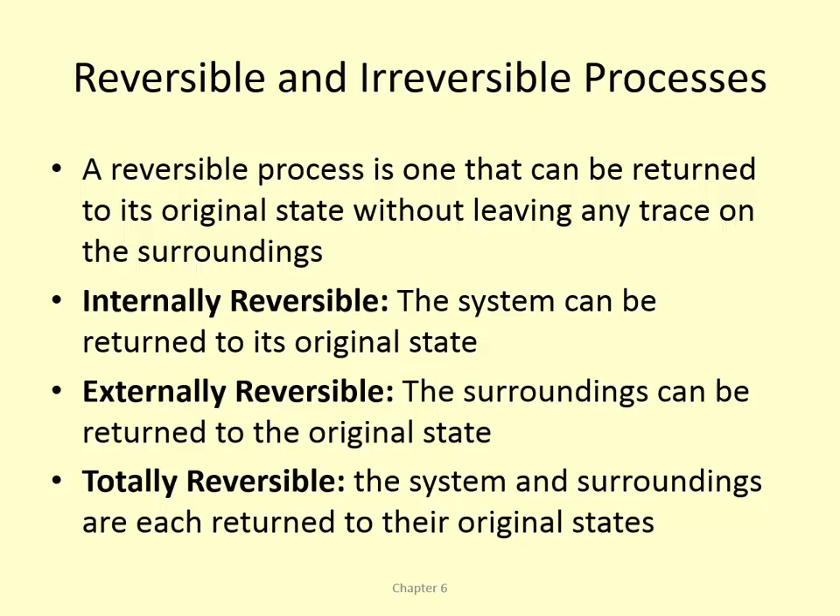Some irreversibilities that we often find: friction, unrestrained expansion. So if it's a rapid change in pressure, it can cause a rapid change in temperature, which means heat is being lost from the system, or depending on which side you're looking at, heat is being gained somewhere else.

Electrical resistance—we have electrical work that's being converted to heat, and once it's changed to heat, that's an irreversible process, because we can't then take that heat, put it back into the wire, and convert it back to electricity. Only a fraction of it, maybe with the right types of materials, can be converted back to electricity. So heat transfer is always a one-way process.

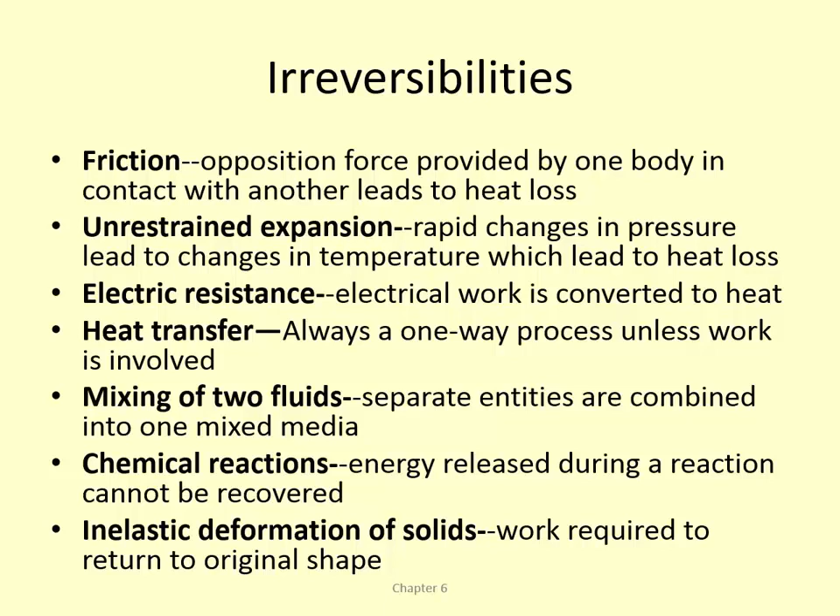Anytime we mix two fluids together that we can't separate back out again, chemical reactions are irreversible. And an inelastic deformation, like a car accident—your car's never going to be the same. You can return it back to the original shape, maybe with new parts, but even if you knock out all the dents, it's never going to be quite the same again, right?

We talked about perpetual motion machines, and that real processes have to satisfy both the first and second law. We may have some device that purports to do something really spectacular, and a YouTube video proves it can do this thing. Well, if it's violating the first law or second law, then it's not really doing what it claims to do. You can show a lot of things on a video that are not true.

If it violates the first law, that means it's violating the energy balance or conservation of energy. Then it's a PMM1.

If it violates the second law, then it's a PMM2, meaning either it's converting 100% or too much heat to work, so its thermal efficiency is greater than the max possible, or energy is being transferred in the wrong direction. Then it would violate the second law. So understand the distinction between those two, and there were some good examples on that exam.

The Carnot cycle is a reversible cycle that we use as a model for the best case scenario, an ideal that we can compare our real cycles to. It consists of 4 steps, very important. I would suggest you figure out how to both draw the Carnot cycle and repeat those steps if needed.

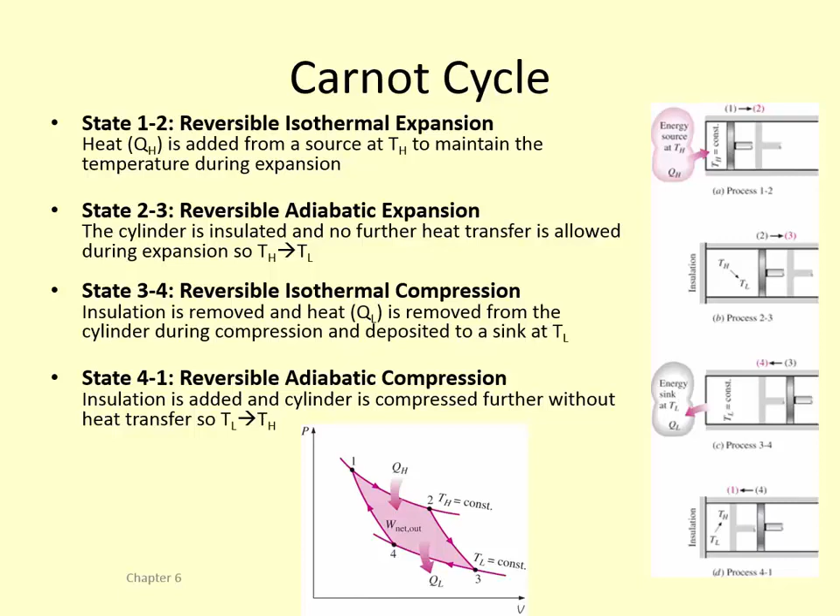If we operate them in the reverse direction, then we have the reversed Carnot cycle. The 2 Carnot principles were: number 1, that the efficiency of an irreversible heat engine will always be less than that of a reversible one. And the second is that all reversible heat engines operating between the same 2 temperatures will have the same efficiency. So those 2 Carnot principles are good to know.

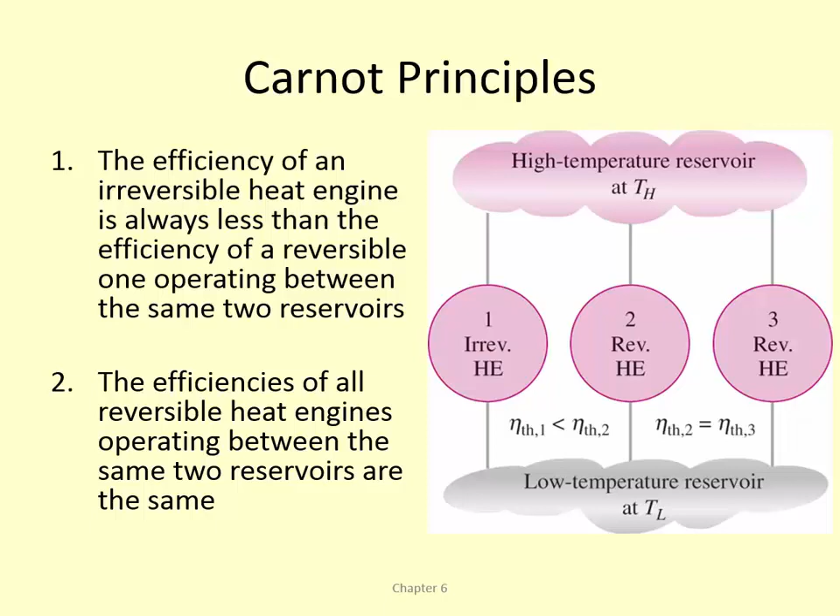The Carnot heat engine operates on the reversible Carnot cycle, meaning the standard Carnot cycle that is reversible. We can use the knowledge of our temperature limits to calculate the reversible efficiency of that device. For regular heat engines, we use the desired outcome over the required input, which would be work out over QH or Q in, which we can rewrite because work out equals QH minus QL. If we play with that, we can write it as 1 minus QL over QH. But for the Carnot cycle only, we can replace QL and QH with the temperatures of the reservoir, and that gives us the highest possible efficiency for any heat engine between those two reservoirs.

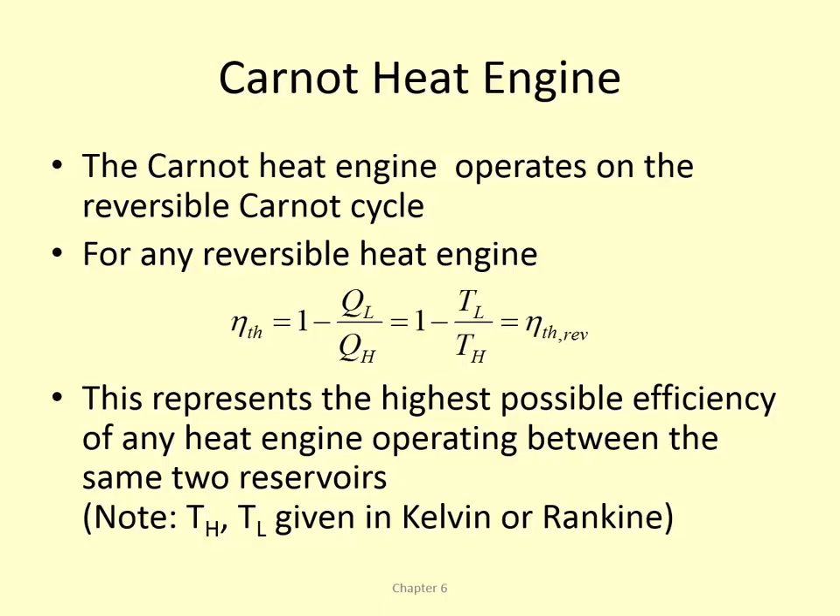It's important to note that we have to use the absolute temperature scale, so we can't use Celsius and we can't use Fahrenheit. That has to be temperature in terms of Kelvin or Rankine.

The Carnot refrigerator operates on the reversed Carnot cycle, with the outcome being removing heat from a refrigerated space. We can similarly write a reversible thermal efficiency using the temperature limits as our inputs, as we take our previous equation and rearrange it. That's the reversible coefficient of performance for a refrigerator.

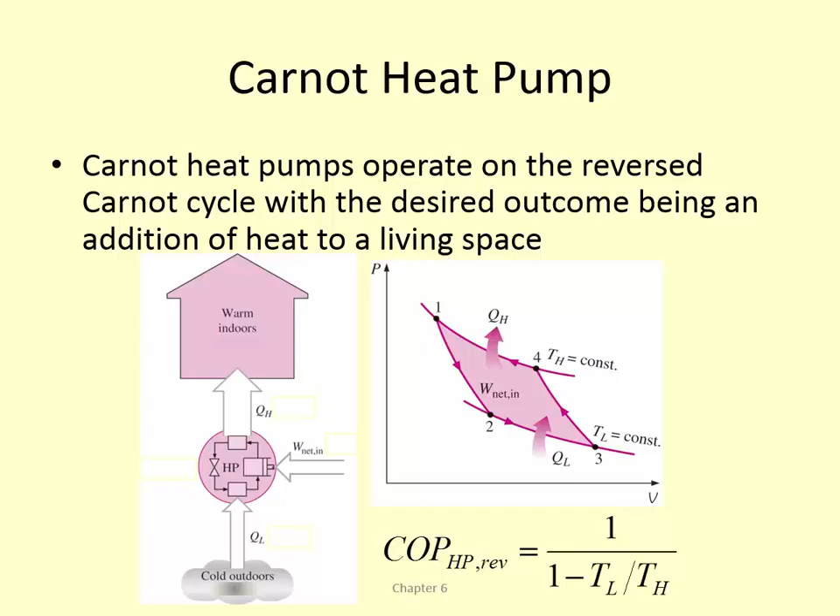The same thing can be done for a heat pump, where we're now using the reversed Carnot cycle, but we're just changing where our QH and QL are going. Rather than removing heat from a cold space, we're actually adding heat to a warmer space. Again, we can calculate that Carnot efficiency for a heat pump operating on the Carnot cycle.

Okay, entropy. This is probably the least favorite subject of most students because it's a little bit more difficult to understand. We talked about how, for a reversible process, the change in entropy is going to be that integral of del Q over T. So if we looked at a T-S diagram, the plot underneath is the reversible heat transfer.

But for an irreversible process, we generate some entropy during that process. So if we calculate the change in entropy for a process, looking at the system and the surroundings, and it ends up being negative, meaning entropy generation is negative, then it's an impossible process—that's not a process that could occur in real life. This gives us another numerical value, a way to look at devices or processes and determine if they're violating the second law. Before, we could just look at something and think, I don't think that's right, or maybe we're not sure, it seems too good to be true. So if we apply the principle of entropy and calculate the entropy generation, if it's 0 or negative, it's probably not a real process.

We can also look at the entropy generation for an isolated system, which would be a system plus the surroundings, and that value is always greater than or equal to 0. So it'll be greater than 0 for any real process and equal to 0 for a reversible process.

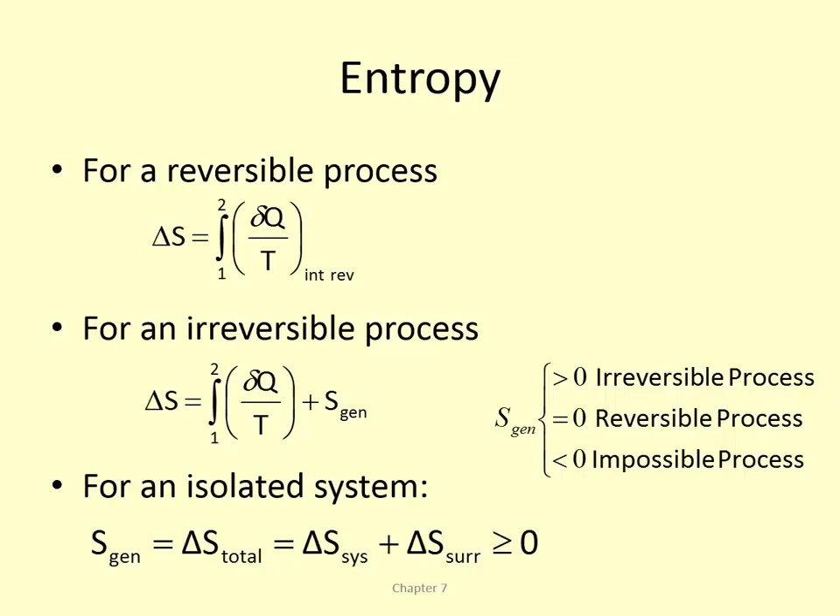The increase of entropy principle is just that entropy is always increasing, that there's always some entropy generated during a process, and it's not a property of the system. Just like heat and work are only recognized as we undergo a process, the same goes for entropy generation, meaning we could get from state 1 to state 2 in a myriad of ways, and some may be more reversible than others. We might create more entropy doing something a certain way versus another process. Similarly, how much work is required depends on the process itself, and that value is always positive, or in the rare case of a reversible system, it will be 0.

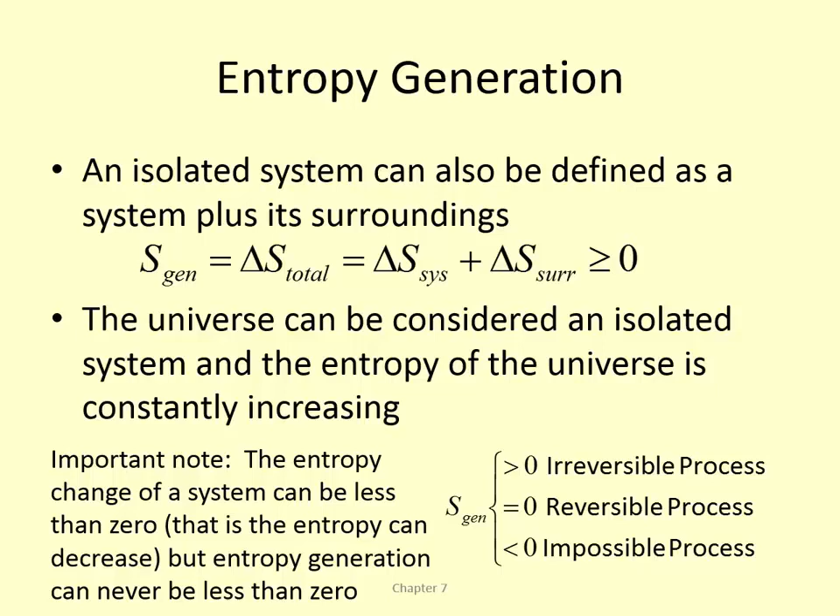So the entropy of the universe is always increasing. We can look at individual components of the universe that have a decrease in entropy, but it's because it's increasing elsewhere by a greater amount. So let that keep you up at night.

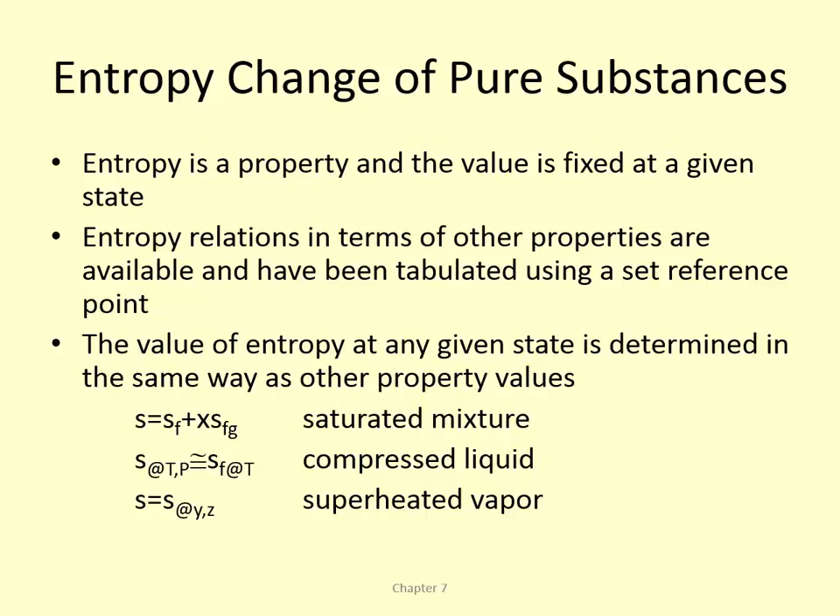Entropy is a property value, so it's also something we can look up in tables. The tables we use in the book are set at absolute 0, so the 0 entropy value is set at absolute 0 when there's no molecular motion. We use it just like any other property value when calculating entropy at a state, just looking it up in the table. If it's a saturated mixture, we need to know the quality, and we can determine the quality if needed. For compressed liquid tables, we can use the incompressible approximation, looking up the fluid properties of a saturated liquid at the same temperature. For superheated vapor, we just need to know 2 independent properties to look it up.

An isentropic process is one where the entropy is not changing. We often approximate engineering devices as adiabatic, meaning there's no heat transfer, and reversible, meaning there's no friction, head loss, or other irreversibilities happening. Then we can say we're going to approximate this as a constant entropy process, meaning we're not generating any entropy by undergoing this process. This allows us to do a best case scenario analysis, meaning we're looking at the greatest work output or the least work input, because we're not throwing irreversibilities into the mix that serve to decrease our efficiency.

Reversible adiabatic always means isentropic, but something can be isentropic without being reversible and adiabatic. It could be irreversible, but the heat transfer applied to the system makes up for any change in entropy.

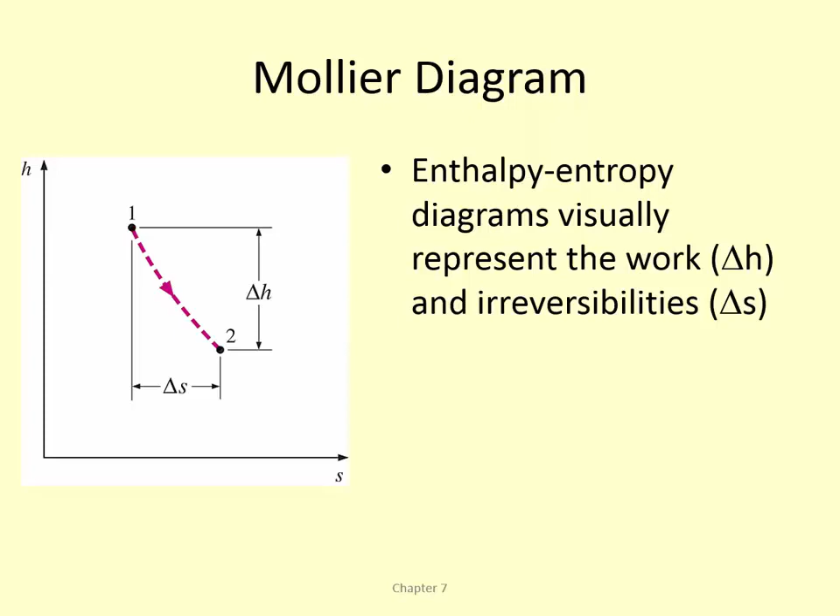The Mollier diagram is an H-S diagram, and it gives us at a glance the change in enthalpy and the change in entropy. If we think of enthalpy change as like work and entropy change as like irreversibilities, this Mollier diagram gives us a good idea of how our system compares to another system when it comes to how much work can be produced with the least amount of irreversibility. It's used often to compare processes, where ideally you'd want delta H to be maximized and delta S to be minimized for a more efficient or effective system.

We had a couple of equations called the Gibbs equations, which were derived using the relationship between enthalpy, internal energy, pressure, and specific volume, from the flow energy equation. We can also look at it in terms of other property values, such as internal energy or enthalpy, to derive these equations, which are applicable in calculating the properties or changes in entropy based on other property values. So if we know a change in internal energy or the change in specific volume, then we can calculate the change in entropy.

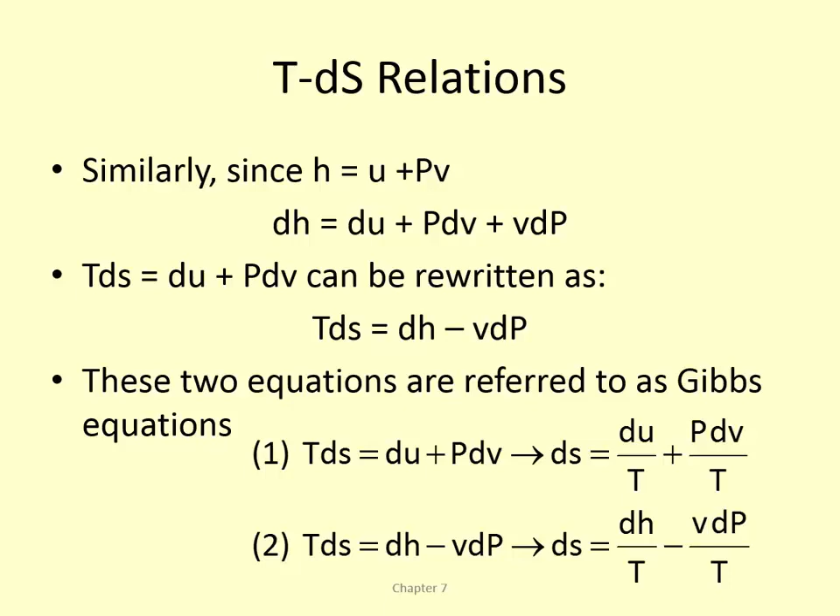Similarly, if we know that something's constant, like let's say the volume is not changing, then the ds is just equal to du over t. We can cancel out terms in that way.

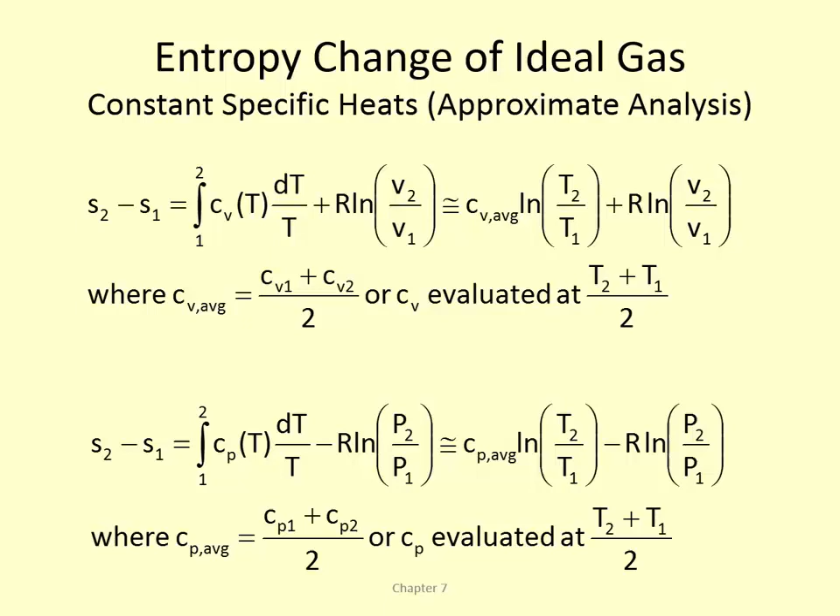So these have three approximations that must be satisfied. One is that it's an ideal gas. Two is that it's constant specific heat. And three is that it's isentropic.

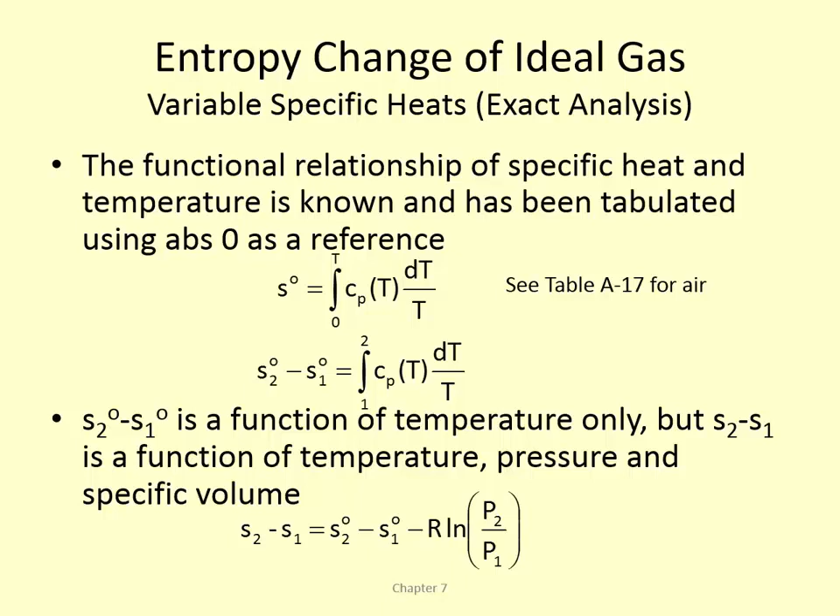And we can use it in our equations to eliminate the functional reliance of C sub p on temperature. So by going to the tables to look up that component, we can still use these equations in an algebraic fashion without actually having to calculate an integral every time we want to know the change in entropy, because the integrals themselves have already been tabulated.

So this is the exact analysis: if we set those equations equal to 0, we say that there is no entropy change. Then we can use this reference entropy to calculate, like we can use it to find a change in pressure.

We can determine the second state of an isentropic process using that. If we don't know the temperature at the second state, but we know the initial and final pressure, then maybe we can calculate this second reference entropy and then use that in the table to go back and look up the temperature.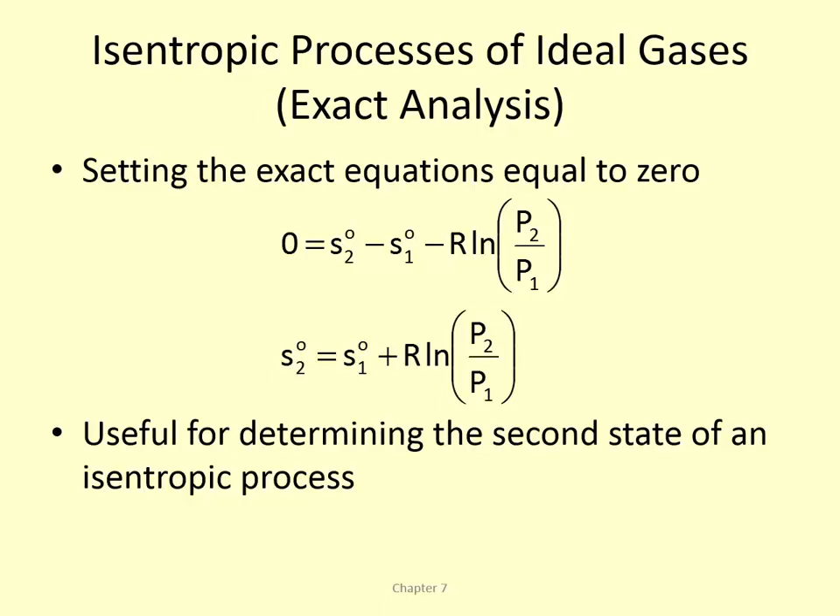We can do a similar thing using the pressure ratios, where we have this relationship for constant entropy that P2 over P1 is equal to these reference pressures. So it's a similar idea to using that S superscript.

And we can also do the same thing with volume. So there's three different ways, using the pressure relations or the volume relations, to help us find the final temperature for an ideal gas. And again, this is only for an ideal gas isentropic process.

Yes? Quick question about that. Yes. EXP, is that like E to the... Yeah, yeah, it's just harder to type, write that. Yes, okay.

For reversible steady flow work, if it's undergoing an internally reversible process, we can determine by manipulation of the energy equation and application of the Gibbs equation that the reversible work is equal to the negative integral of VdP minus the change in kinetic and potential energies.

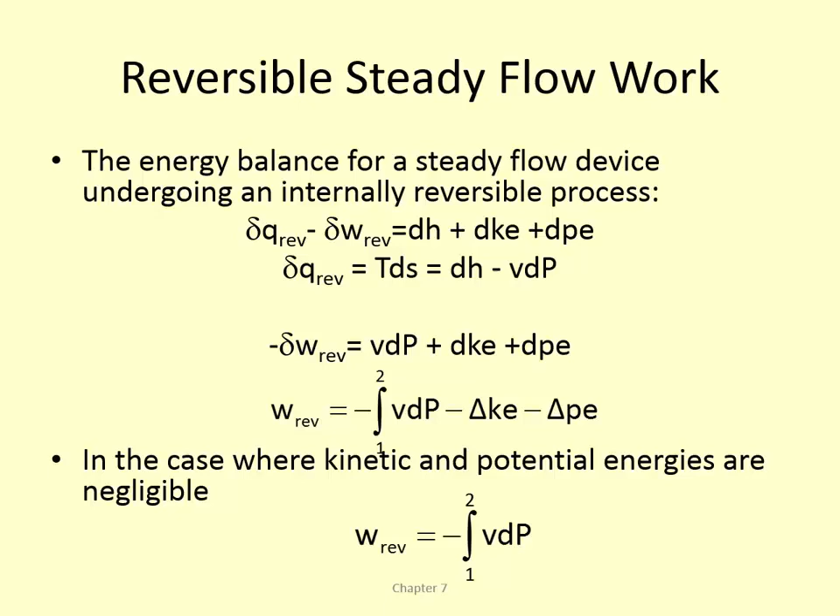And if we're ignoring those terms, then we can find that the reversible work is equal to that negative integral of VdP. So the work out is a negative VdP, because the sign will be accounted for in the change of pressure if it's negative.

We talked about minimizing the compressor work by removing heat as we are compressing. So in the isentropic case, that's just a constant entropy process. We don't apply any cooling, then we use those equations.

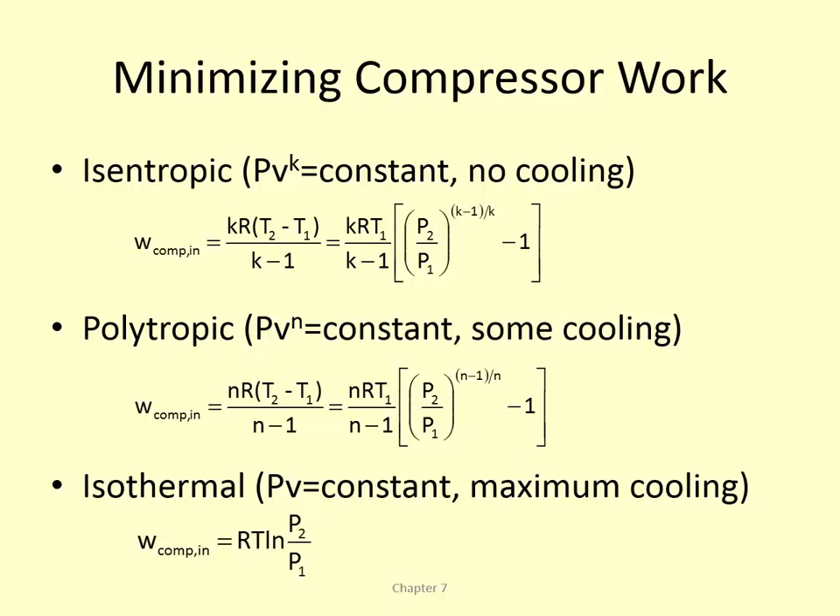If we apply some cooling, meaning polytropic process where our N value is less than K, then we have slightly less work into our compressor. And if it's an isothermal process, that's the best case scenario to minimize compressor work, we have that equation there. And we did homework on that. That should be straightforward.

We can also do multi-stage compression where we have a stage in between, and we can minimize the compressor work when the pressure ratio is equal to one another in those two equations. So Px over P1 is equal to P2 over Px.

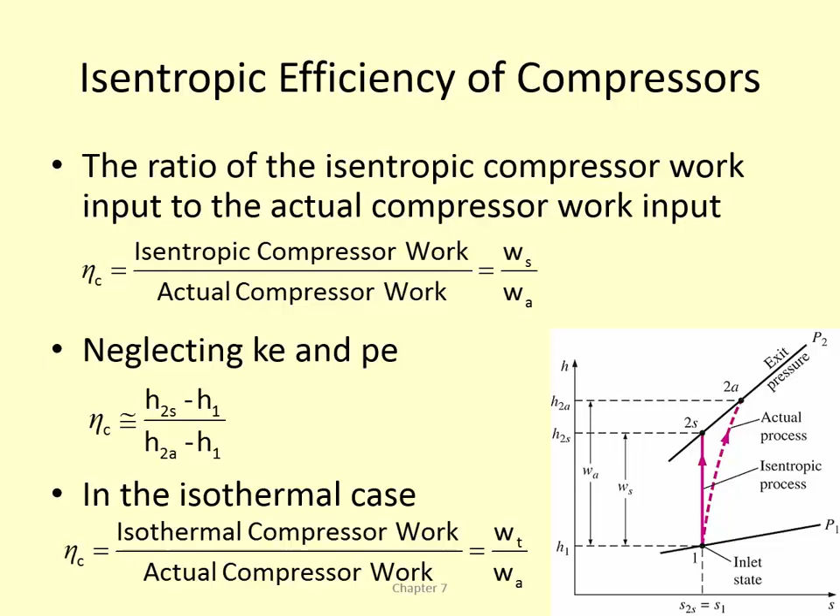We can calculate an isentropic efficiency of a compressor using the actual compressor work and the isentropic compressor work, essentially asking how closely the actual process resembles an isentropic process. If that efficiency is 100%, the actual process matches the isentropic one, and the further it deviates, the lower the efficiency. This should be fresh in your mind since you just did it on the homework.

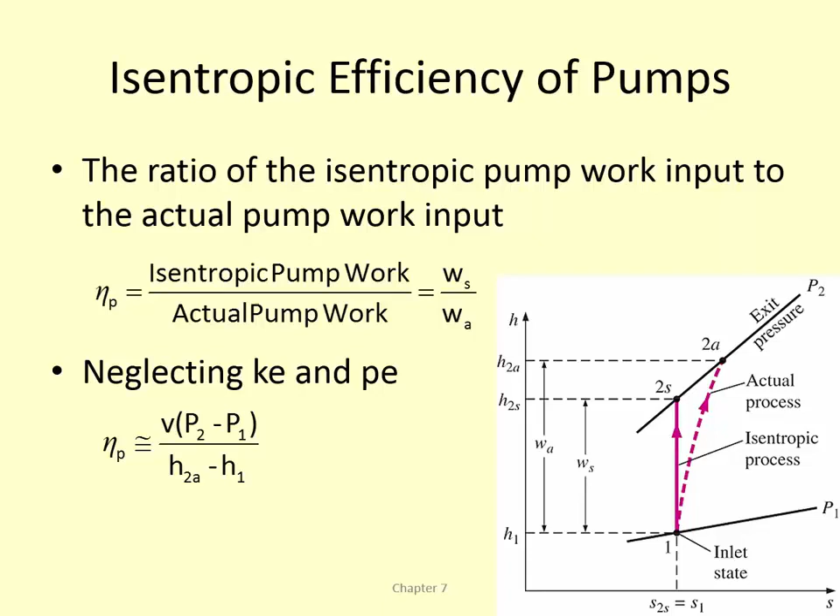The same approach applies to turbines, comparing the actual case to the isentropic case. We can do the same for pumps, recognizing that pump work equals V times P2 minus P1, since we make the incompressible approximation. For nozzles, we look at kinetic energies to determine those efficiencies.

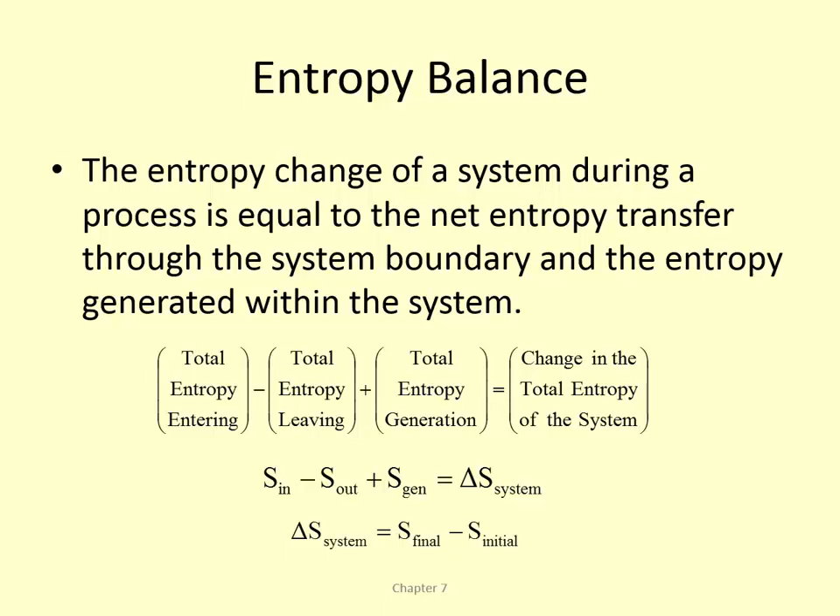We can perform a total entropy balance: S in minus S out plus S generation equals the change in entropy of the system, that is, S final minus S initial. We looked at this for closed systems. If it's an adiabatic closed system, entropy generation equals S2 minus S1. If we look at a system plus surroundings, entropy generation equals the change in entropy of both.

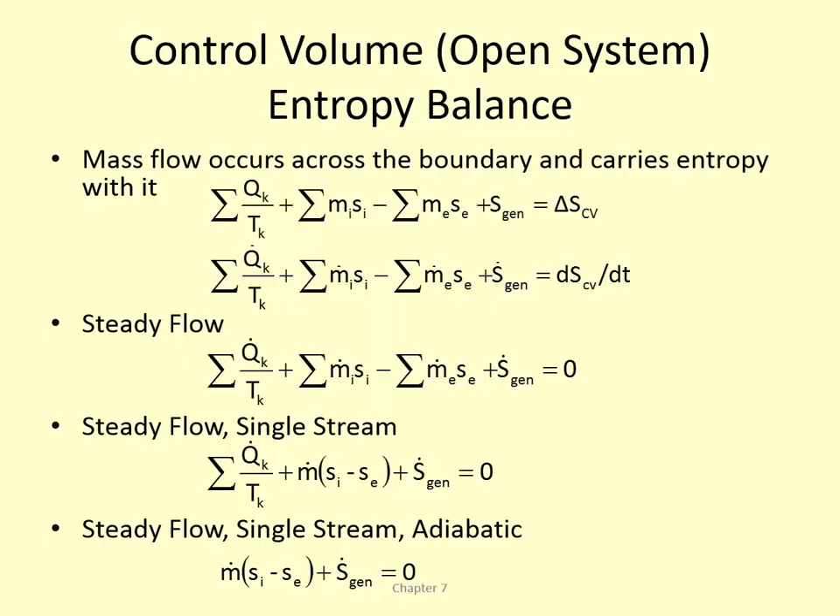For an open system, there's entropy coming into the system with mass flow, so those equations apply — hopefully these are familiar to you. It's important to note there is entropy change in the system due to both heat transfer and mass flow; you have to account for both terms. If there's heat transfer coming in at a certain location, you need to know the temperature at that location.

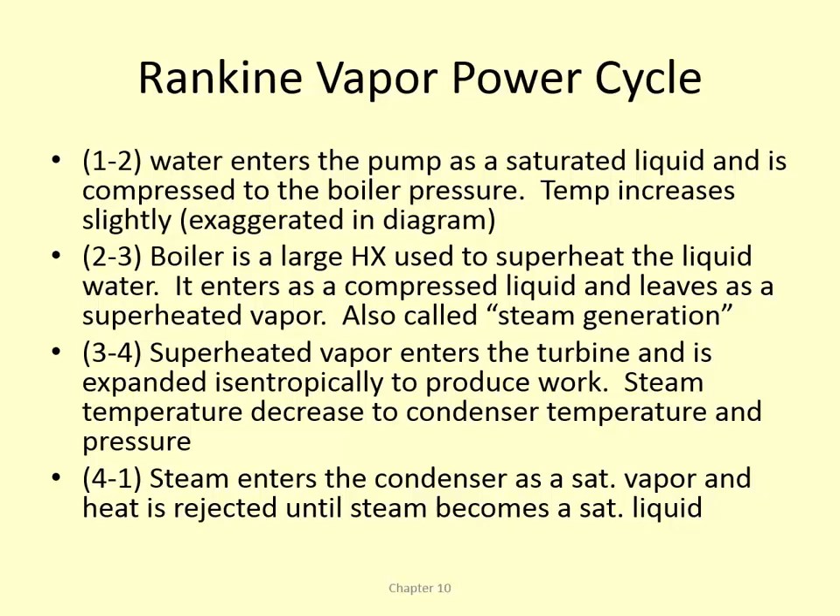Then we talked about the vapor power cycle, looking at both the isentropic and the non-isentropic, or actual, vapor power cycle case. It's very important for you to know how to draw that picture and the steps involved. This is all recent material, so I'll spend less time on it since we're out of time, but you can perform the energy analysis using those steps.

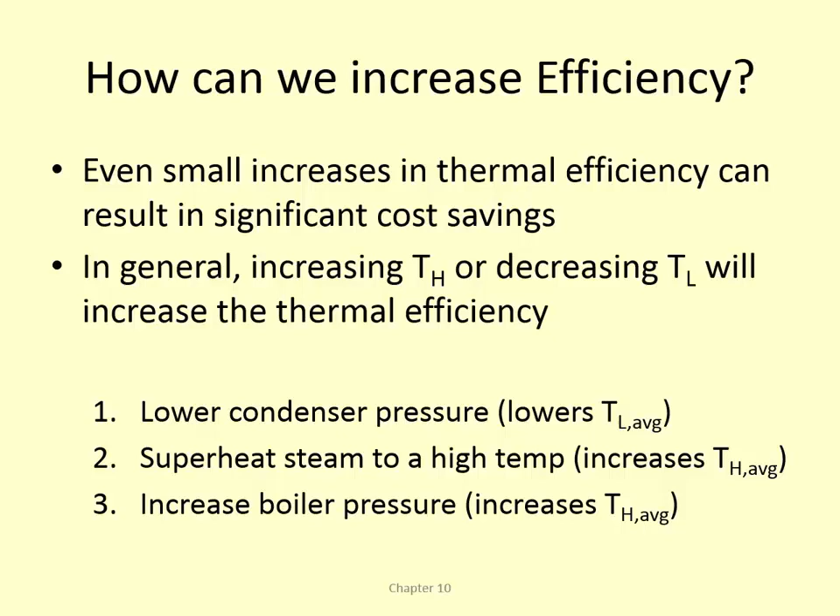We looked at deviation from ideal and how we can increase it. It would be good for you to know the ways you could increase the efficiency of a Rankine cycle — that might be a good exam question.

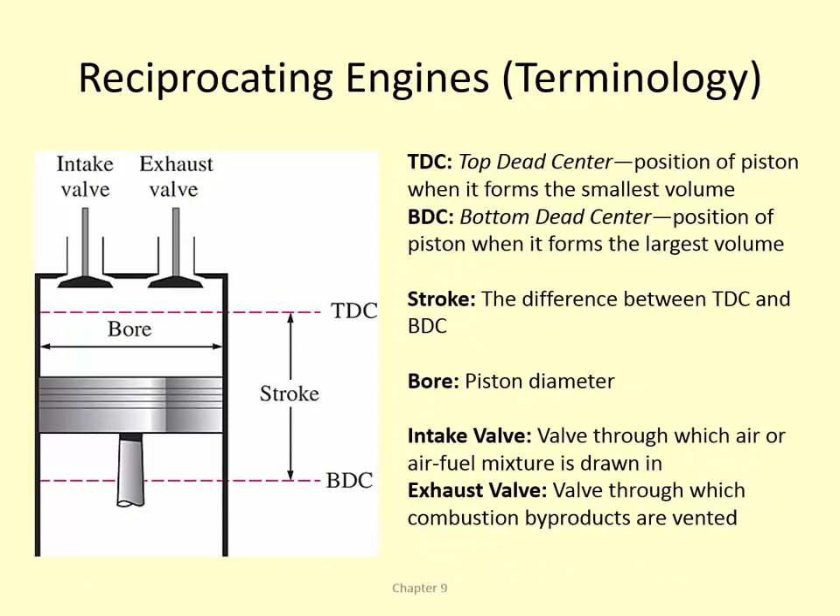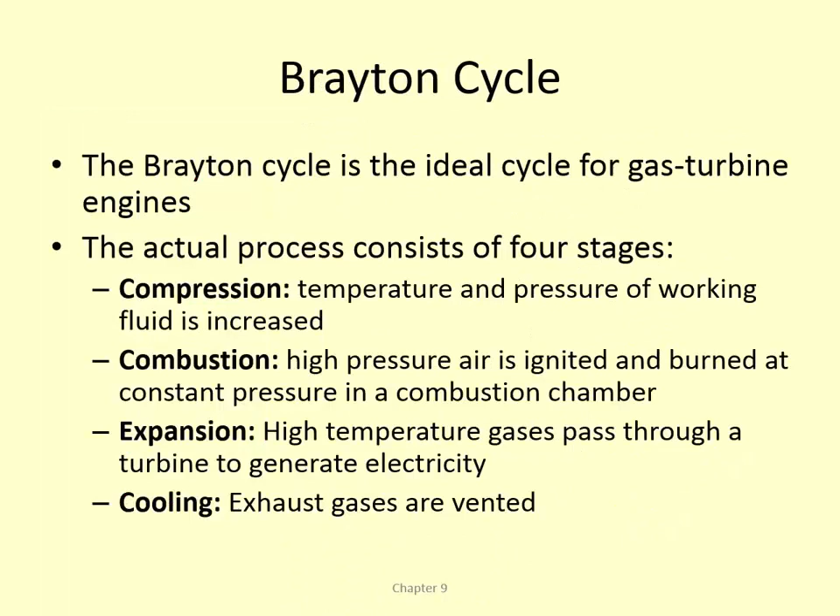In the last lecture, we talked about the air standard cycle and the assumptions that go along with it. For this section, terminology is very important — there may be a diagram you'll be asked to label with terms and conditions, or you might need to define any of these. It would also be good for you to know how to draw, for example, the Otto cycle or the diesel cycle and the four steps involved, as well as the Brayton cycle, which is for a gas turbine engine power plant.

For the final, you'll have two sheets of paper, just like the other exams, and I'll give you the equation sheets and property tables you might need for the problems. Good hint: if there's a property table, you probably need to use it. So don't freak out and try to use the ideal gas law because you can't figure out how to find the water temperature or whatever.

It's comprehensive — by nature of this course, everything is comprehensive from beginning to end, and you should have seen that pretty clearly today. But the emphasis will be on the material you haven't already been tested on, so entropy is a big part of that, including being able to calculate actual and isentropic states using the Rankine cycle.

There will also be short answer problems and homework-style problems, a mix of both, and it'll be slightly longer than any of the midterm exams. It'll probably have more short answer questions and maybe the same number of homework-style problems, but it's going to be a little bit longer, so you'll have two hours instead of an hour and a half. Good luck, study hard, and I'll see you Tuesday morning, bright and early.